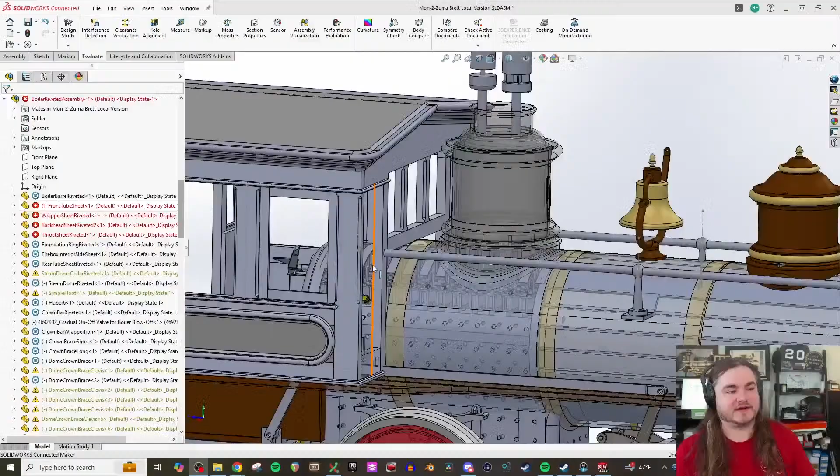Anyway, here we are. I'm gonna keep working on the Throttle today, Mon-Two-Zuma. We got the bar and part of the, we've got the packing gland, the bar, the quadrant, which she didn't have.

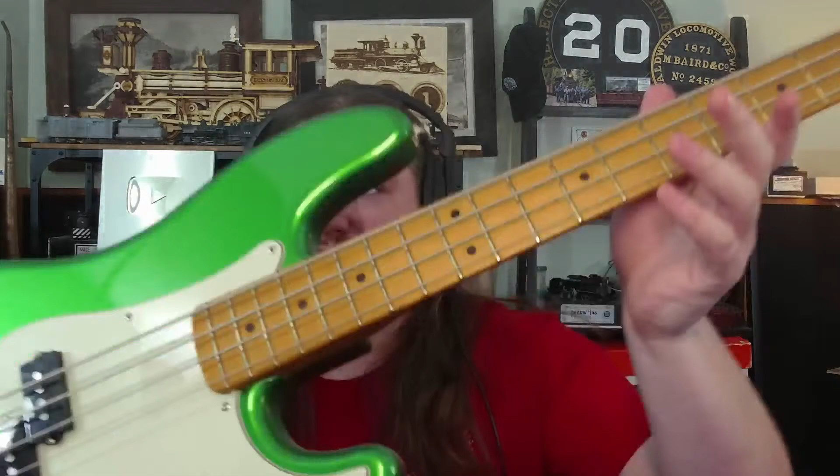William Nimmo: hello all, keep the info coming, you're sick and need the cheering up you always bring my way. Flat or round wound bass, of course. You know, Will, of course, thanks for being a conductor for 2.5 years. I've never experimented with different bass strings. I'm pretty sure these are rounds on my P bass. At least I'm pretty sure they are. You'd know better than I do. I've seen flat ones once or twice, but I'm pretty sure those are round wounds. I've heard flats are cool.

I haven't done much of that, and they work for me, so I don't know. I'd be curious, shoot me an email with what you think. You're the bass playing man. I'm not, I own 3 basses. I was actually playing the upright a fair bit earlier, my fingies hurt. So I wrote a riff on the upright, and it's gonna turn into a song, I think.

So everyone's asking what's more of a pain in the ass. This is finicky little detail-y, this has lots of existential questions to figure out. So they're both gonna suck, but we'll get there. Let's see.

ETW Gaming: I'm eating cheese, just straight up cheese, how do I feel about this? I don't have cheese that I can slap on my desk like James May, but cheese. I mean, it would make me poop, but, you know, cheese is good. Thanks for being an engineer for 20 months.

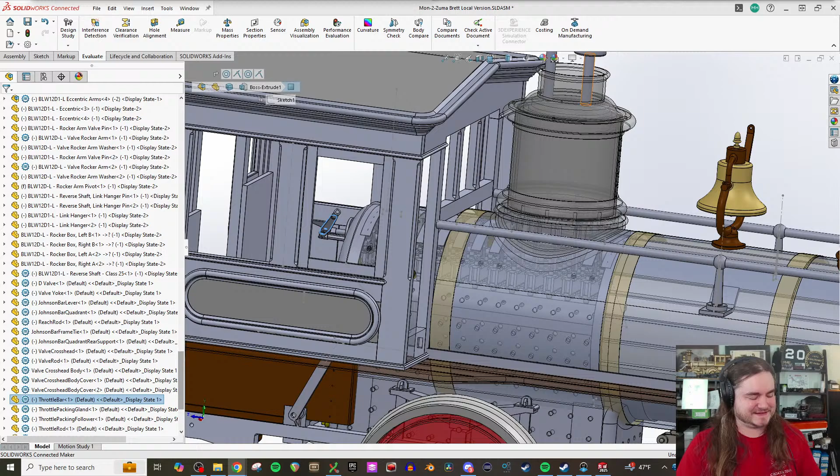Oh well, now we're more on the squeezy thingy, okay, why not, we'll do the squeezy thingy. Tristan's giving me 10, including the squeaky. All right, I'm gonna have to learn one more to get an 11th in there. Is that everything I play? Shrug.

I'm gonna have to look at pictures of Glenbrook again, I think, because she's gonna have a very similar squeezy to what this is gonna need.

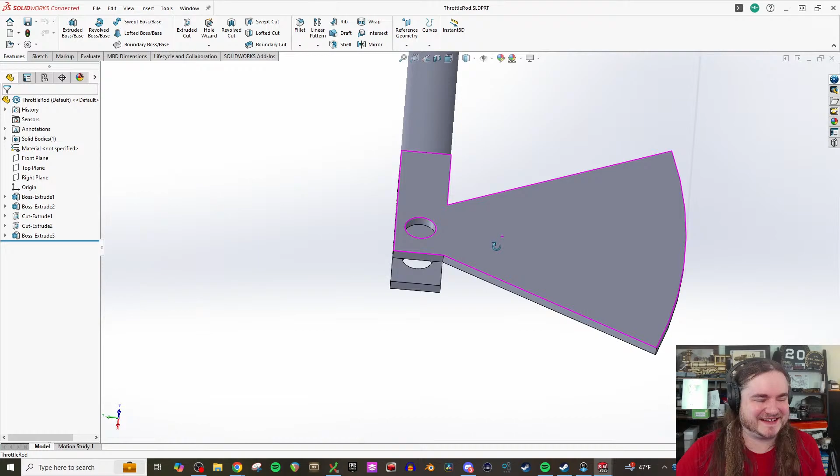Middletown Branch Productions - what will happen and how much alcohol was ingested yesterday. It was not a crazy St. Patrick's Day experience for me this year. I had a couple, you know, inappropriate - don't ever order this in Ireland - beverages. Had a couple Irish car bombs, which are always fun. We had 2 and then a couple beers and hung out, but played GoldenEye and Mario Kart 64. It was a fucking great time. That was at Dusty's, it was fun. But yeah, it wasn't like a super crazy drinky thing, so more low key and reserved. Yeah.

Do I just want to just? It's got a different profile on it than I drew, basically. Looks more like a swoopy, curvy guy.

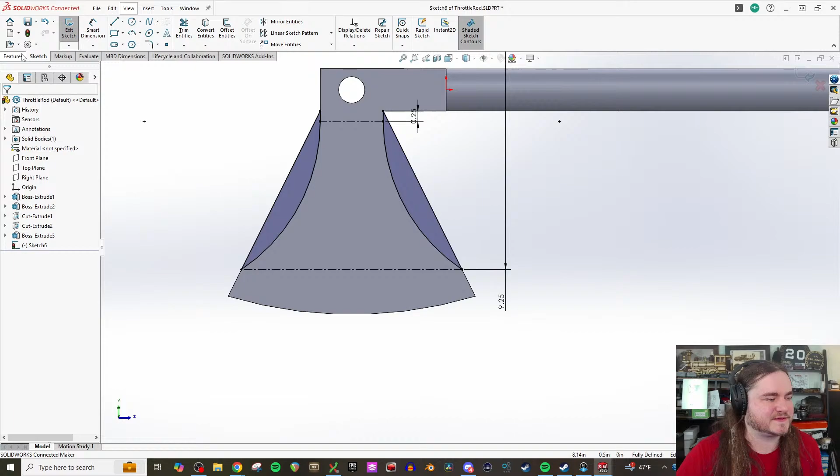Broadway got me a couple more choo-choos to do a video on. They're neat. I haven't actually opened them, but I know what they look like and the prototypes are neat, so I know they're gonna be neat. I need to get that macro lens, I think, because that was such a huge deal at Chris's layout.

I touched an XLR cable that I shouldn't have touched. Don't do that, cannot advise that. Obviously.

Dear Mass Cannon: if it's not already on your list to react to, you should watch the train episode of Mighty Machines, 'tis very silly. Okay, I'll have to put that on my list.

And then Ben Stein asks, would it help if some of Zuma was tungsten? It'd help make it more expensive. At that point you may as well ask, would it help if some of Zuma was depleted uranium? Sure, shrug. All right, that shape sparks a little more joy.

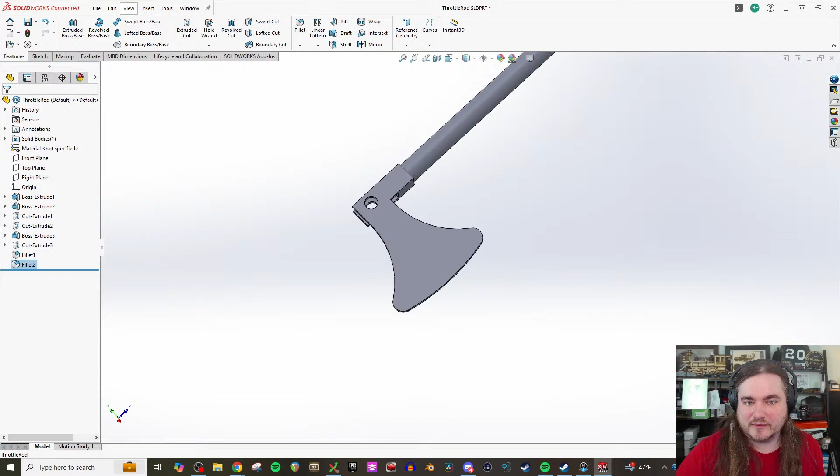Glenbrook's is so decoratively cute, she's got these obnoxious fillets going on just for the sake of being pretty, which is this kind of choo-choo. Also, hers looks like it's thicker than 1/4 inch or whatever we made this. That looked at least to be 3/8 to half. Yeah, I think it's 3/8, I don't think it's half.

But you know, I guess if the choo-choo tries to spit the throttle at you, you want the teeth to do a good job. Oh Lord, oh we didn't even do 1/4, we did 3/16. It's almost the same, it's almost the thickness of the bar. That's thin, that is thin. We don't like less than 1/4 inch on trains.

Oh yeah, that is way too goddamn spindly. What was I doing last week? Talking with Jason Subchinsky and giggling, I think. That sums up most of last stream.

Yeah, we'll just extrude the whole damn thing a little bit further that way. I think there may have also been a 'this looks like a nice start and will be future Brett problems.' There was a little bit of that. That's very true.

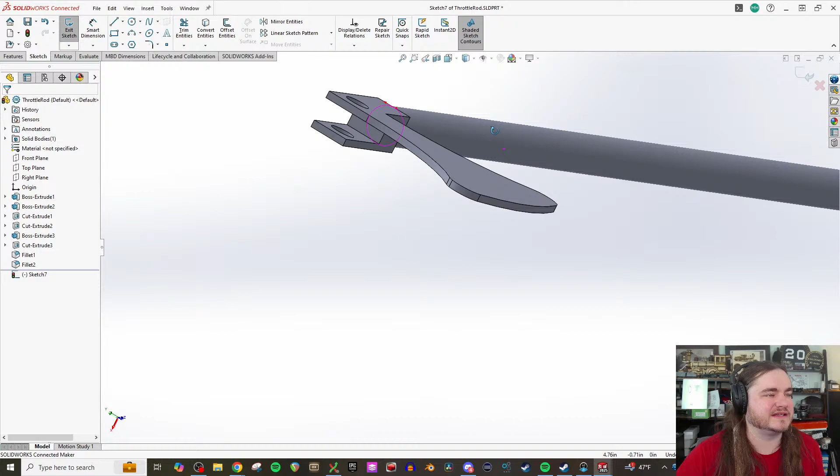Texas Keykeeper: speaking of guitars, have you ever heard of a Peavey T-60? It's been on your want list for a while now, for whatever random reason. I'm not hugely hip on all the Peavey things, so the T-60 I'm not familiar with, but we can look one of those up real fast. I think I've heard the name. Oh, it's kind of a goofy looking thing.

It's like a Stratopol. A Lescaster? Like, well, not really. Yeah, like the front, if you close your eyes at the first pickup, that's very Strat shaped, although the lower horn's a little long, and then it's almost between a Les Paul and like a 335 back there. Interesting. Peavey's a vibe, I don't know if it's a good vibe, but they're a vibe.

What are those wacky toaster pickups, though? That's a great question.

Oh, I should have - nah, we can reapply that extrusion. That's fine, fuck it, we'll do it live. Doing it live. If we do 3/16 that way, we'll get... and then we can just simply make this apply to both directions.

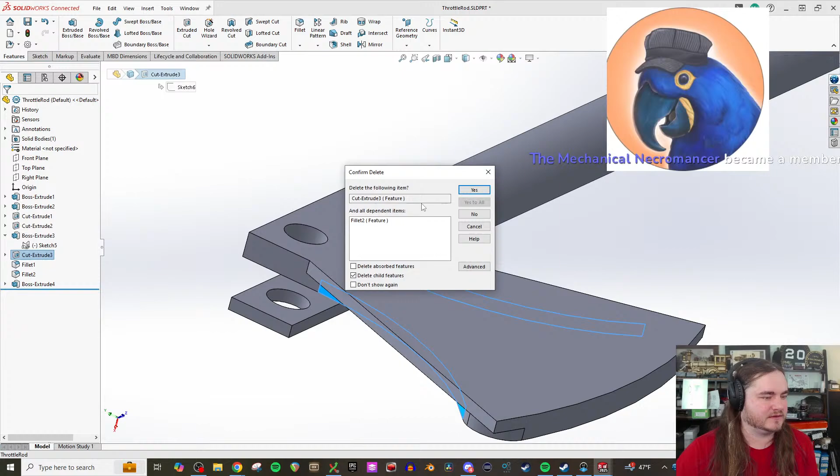Oh, I said 'through all both,' you bitch. Oh, it doesn't know that exists because it's above it. Oh my. Fine, SolidWorks, why you be like this? It's me doing CAD improperly, really, it's not SolidWorks' fault this time.

This is understandable, it's always funny when the real CAD wizards are in chat watching me be an idiot on stream, they're like 'no, don't do it that way.' What if I do it that way, though? What then? Where's your God now? Oh my God, still get the point across. Yes or no, if yes, it works. Basically, I'm not a great CAD person because I do it once a week for this.

And I learned it. Oh God, I learned SolidWorks like 12 years ago.

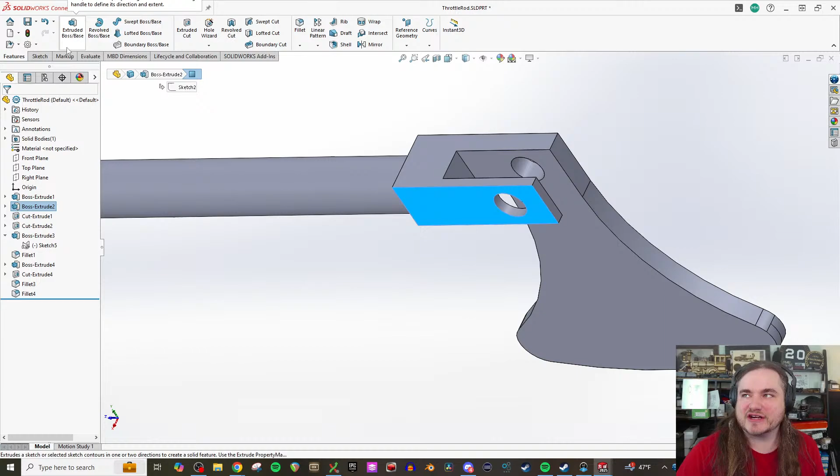Mechanical Necromancer: it's like a Strat and an ES-335 had a bastard child with a Gretsch. Pretty much, it sounds like a Gretsch. I bet it does. I've got one of my favorite guitars for recording, my least favorite guitar for playing actually, because I Malcolm Young'd it. It's got 12s on it, on an electric, because I wanted the Malcolm Young thing. And then anytime I'm like, I need a chunky rhythm and I need to feel like I'm playing a god-awful big chunky rhythm, there it is.

Oh shit, to make that thicker. We're just doing this part all kinds of wrong to figure it out. It's fine.

I've got a replica Filtertron that is zip tied to the pickup ring for the bridge pickup, and that guitar sounds rad.

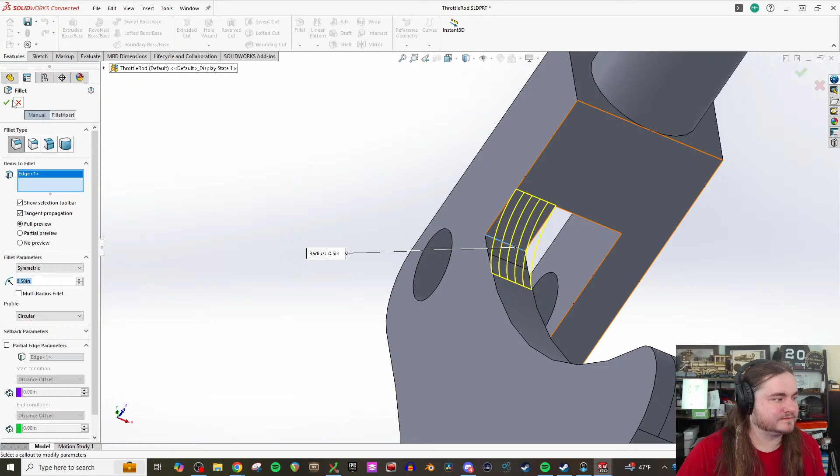Make the things look a wee bit prettier here, put the fillets on them. Fillet o' fish. Yes, that.

Evan Grease, hopefully that's pronounced right. Howdy Mark, building a Lonergan whistle right now, seller said it measures 11.5 inches long by 2 inches diameter. You've been bidding on it for 4 days now. Are you winning? That'll be neat. 11.5 by 2 inch diameter's real small, but that chamber length, the pitch should be ballpark a Norfolk and Western hoot. I'm pretty sure those are 12 inch, so that'll be cool.

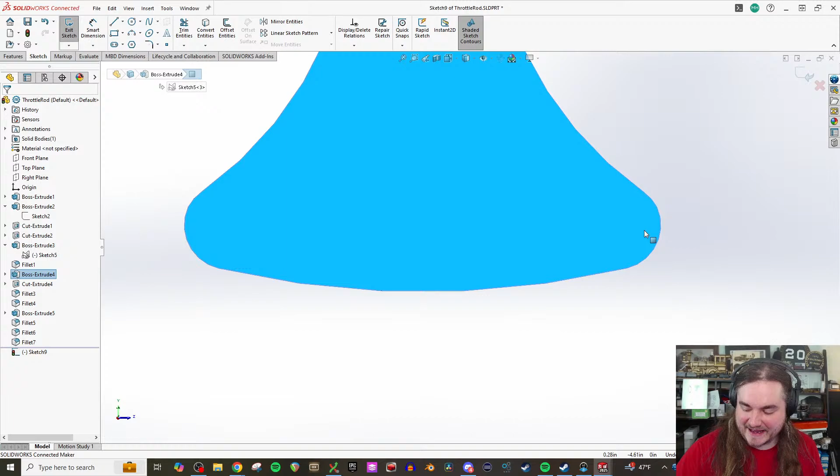Red Gray 99, hi, was Zuma ever the latest and greatest for its time, or was it always just a little guy? It was always just a little guy. It wasn't as much of a little guy when it was brand new, but now it's absolutely itty bitty ancient.

Cassidy HGR, I can only presume this is AC9. Hey, Allagamer, garg my nads. You misspelled gargle. You see what had happened is they were all like, hey, Mon-Two-Zuma Tuesday's going on. I'm just like, oh, I should go up there and poke my head in and see what's going on.

I see, yeah, you guys were doing cleanup sesh from what I could tell. Brace yourselves, everybody. Yeah, we've got the server cleaned up.

My plan is we're gonna take a little bit of a hit to our passenger reputation, but we're gonna try to do an extra freight session so I can get all of the express freight and the extra spawned-in cars off the map, so that whenever we disable those mods, they don't cause an issue. Yeah, that's gonna help big time.

Raider Davis: where we have RCO in Baltimore, most of the tracks are so close you can't walk between them. Yeah, that doesn't spark joy for sure. That's a problem. No, close clearances, they're not fun. I have to deal with the same thing at Conway, the cars down in the bowl are all super close. Especially if it's snowy out and that car is creeping up on you and you don't know anything about it, that's a good way to get hit. You gotta keep your head on a swivel. Stay safe down there, for reals.

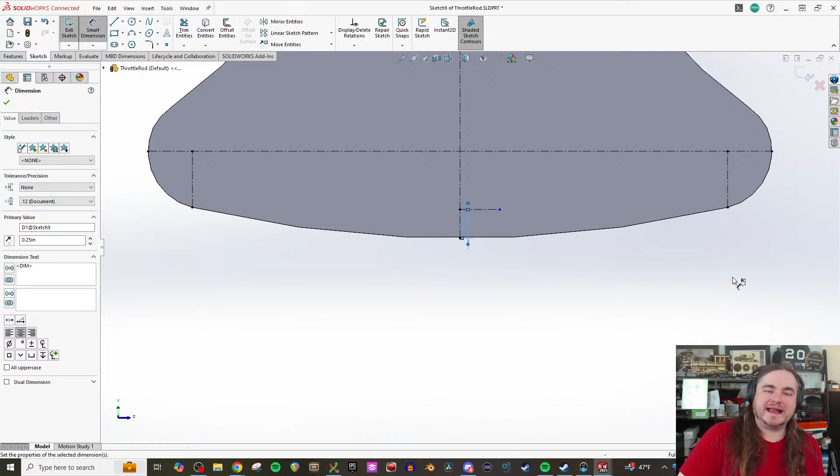Do you know what those track centers are? Spoken like a true civil engineer, Van Dan. Do you think anyone on train crew knows what the track spacing is? Like, actually, like a number they can give you? Yeah, that's fair, I would bet lots and lots of money that none of them do. Depends on where you're at, because they rebuilt some of Conway, so it's not all uniform.

How deep do we think throttle quadrant teeth are? 1/8 inch? I would say 8th. Maybe start at 8th and then go down to like a 16th. I don't think they'd be that small. The railroad is not fond of having things that small in their arsenal. That's true, I'd say 8th. In Last of the Giants, I saw the size of those wrenches - fucking huge. Big chooch, big tool.

Actually, I don't really know a proper way to properly design this, so yeah. Raider Davis, track spacing, too close. Yeah, correct! Designed for itty bitty loading gauge ancient cars, and now we run gigantic modern garbage on it. Well, the thing is the Pennsylvania Railroad, they did try to keep their stuff within its own right, but nowadays it's not.

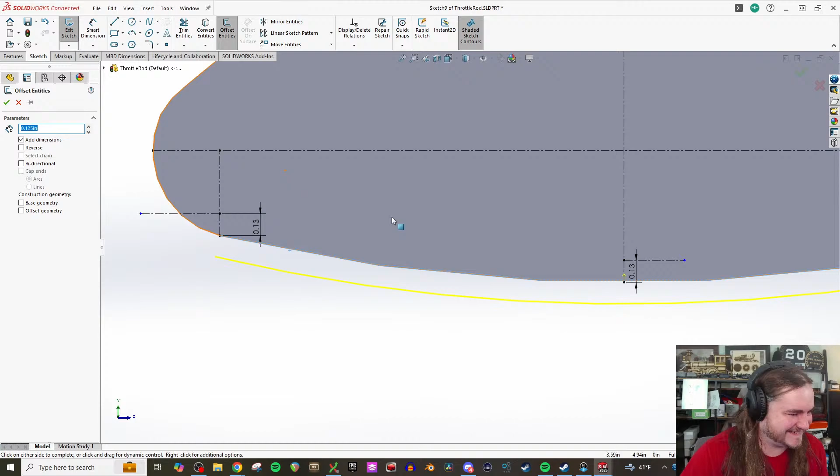Mark, does SolidWorks have any offset functionality where you can offset a line by an 1/8 inch? It does. Damn, yeah, why didn't I think of that? Thanks, Midland, I try. It's just I saw that - I'm like, this might help in a sense. I don't use offset entities often. Yeah, but right, I always forget it exists.

Okay. And we're gonna model these as triangles, Triangle Man. Put some fillets on them, I guess. Remember, you want the triangle shallow enough that it doesn't get stuck, but steep enough that it stays. Right, yeah. This is gonna be - I'm gonna make it look like this. And then we're gonna just repeat it over and over and over again, until SolidWorks says no. Unless it already had - SolidWorks is always saying no.

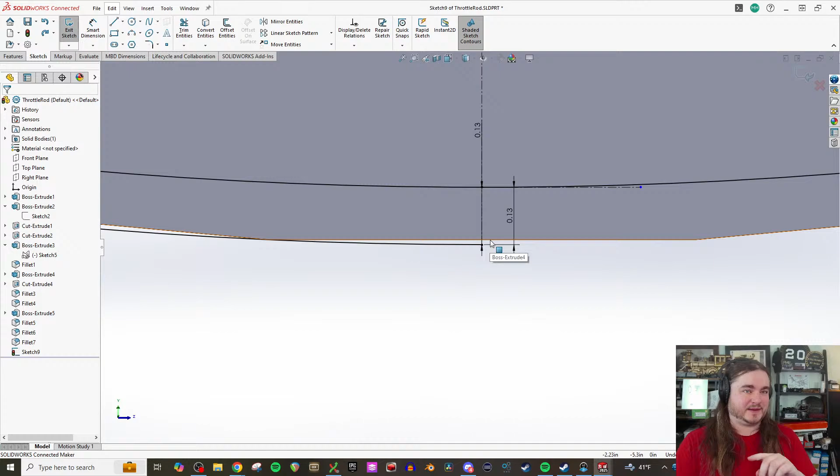Yeah, I don't know what it's doing with that shit right now. It's like, you want this, right? No. Why is that point floating? That's just too damn bad! We want concentric? Yeah, I think it thinks that the way it's rendering it, that point is actually supposed to be on that shape, but... shrug.

Stares at Montezuma. How have I never noticed? I've seen this locomotive in person. How have I never noticed the bell on top of the sand dome? Oh, why you do this? That's goofy.

Why- Oh, speaking of which, Care, I don't know if you saw, but when I tagged you in it, in this game they have the horns right on the GP7s, but not, or GP9, but not the SD7. Like I don't know why. That's weird. I gave you a laugh react on that. That was weird, that was way far back. I haven't looked back that far yet.

It's fine. Yeah, Boker's a little bit more modern. They are kind of cut from the same cloth, though. I mean, it's neat, the pilot looks hell of the same. I still can't get over the bell in the sand dome. How on earth are you supposed to get the sand in? Ring the bell. Ding, ding.

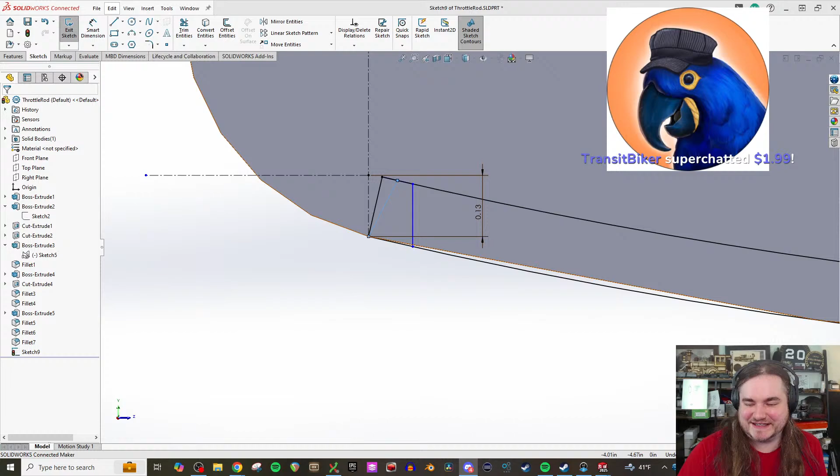If you look at the pictures in Montezuma, we've got that picture of Ute when she was still on the D&RG, and she's got the air pump underneath the engineer's side of the cab. So it means the seat for her pleasure is the engineer's side, not the fireman's side, in the case of Zuma versus JW Bowker.

It's mounted further down on these engines, but I guess the cab's a little higher up or something. It's also a smaller pump. I guess with the 9.5, you'd have to tuck it in there further.

Yeah, because the one you want to put on Zuma, is that going to be an 8.5 or an 8? The most appropriate historically would be a 6-inch. I know the guy who has the patterns to make 6-inch pumps. He's out there.

The challenge with that is there's nothing in the FRA regulations that translates to a 6-inch pump, and they may well tell us to go fuck ourselves and use a 9.5. So if they say we have to, we'll use a 9.5 and have a gargantuan air pump tucked under this thing's butt. A 9.5 isn't big at all, but it is compared to the rest of the engine.

Where's the DE2? It's right there. It's fine. Anyway.

Eden, hey, you did your volunteer orientation at the museum that houses Pere Marquette, Berkshire 1225. You've got safety training this weekend. You're so excited to be finally involved. Do the thing, that's awesome! Love to hear that.

Transit biker, Maschen Yard is adjacent to Hamburg's huge port. Oh, that would make sense. And I got the details messed up on that. I think it was the first incident that started out of that yard, not the second.

Yeah, we need to go look at that engine. Brownsville, Mike Squires asks, was that a steam pump on V&T 21 for a fire train? Oh shit, you know, you're right, it might have been. Because what else are you going to use a 2-4-0 for? Pulling one tank car full of water. Makes sense. Steam jets to scare cattle?

To scare cattle. Midland, have you been here when we've realized that we can see how it's plumbed? I may have been, but I don't entirely recall, so I would love to find out. Yeah, let me pull... oh, I'm not streaming to Discord. Let me do that. Let me pull up those drawings. While I do, I'll keep going through.

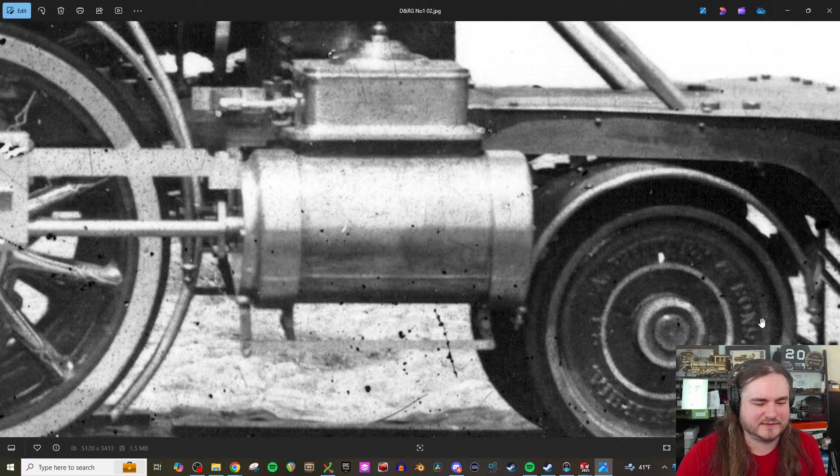I always thought it was, oh, they just aimed the cylinder cocks forward. No, we can clearly see how the cylinder cocks are set up in this. And so you trace it back, and it sweeps up basically under the lead truck or through the lead truck frame somehow, comes in there, and then it hoops up, and then runs hidden, tucked under the running board, all the way back to the cab. And then when we look at the front back shot, which is over here.

Yeah, Discord, if you'd make it easier for me to open pictures, that'd be great. You can see it's way less resolution, unfortunately, but there's the steam jet right there to scare cattle. That one, that's the pipe.

When you look at it in the cab, it's like there are no appliances on this engine. It's nothing. It almost has to be one of the valves up here. Although that might be injector starting, come to think. No, that goes back and then goes down. That's got to be the steam jet to scare cattle. Yeah, because the injector starting is gonna come way higher up. So the injector starting must already be further ahead on the boiler somewhere.

That's neat. Yeah, so I will also remark, when I first joined the stream, I was going to say, oh, so Mon-Two-Zuma's throttle doesn't go through the turret? No, it does not, East Broad Top. God, those engines are so cool, but also, why in the ever-living fuck would you do that, man? One of those mysteries. Yeah, for real. I mean, it's Baldwin, right? But still, yeah.

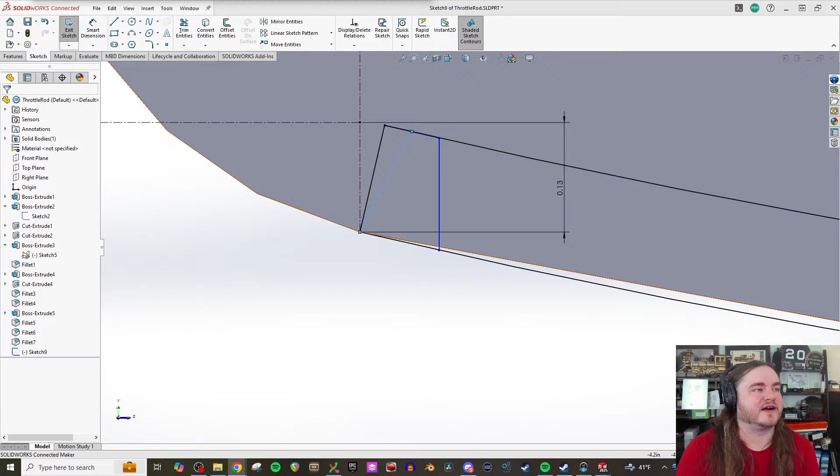Admiral Fraser, hey, new member here, works for Amtrak in Seattle. Oh, cool. Mechanical or train crew or what? Because if you work mechanical, you probably know some people I know, especially if you're out of Holgate. But anyway, if you're really new to the channel, I've lived in Seattle for a long time. I'm originally from there, and I worked for BNSF and Sound Transit out of Seattle for about 6 years. So my choo-choos got maintained by Amtrak at Holgate Street there. So you've got grandparents who live in Colorado Springs - got to visit the museum next time you visit. Please do, come say hi.

John Kissinger, 19 months. Time's fake. Yes.

Steam jet for cleaning your boots, idea - that makes sense. The Class 25s had no air brakes. We just had that discussion. Not as built. Later, yes. Later, when air brakes became a thing.

Not sure if this is going to make objectively too many teeth or what. Let's get a dimension on that. We can make the teeth at least 1/8 by 1/8. That makes some amount of sense, sure.

And then can we do... Some sense is better than no sense. It's true. This is going to be an utter pain in the ass to get a sketch fillet on, and I don't think I want to deal with it.

You work at the coach yard at Holgate. You're a coach cleaner. You transitioned from mechanical to OBS, but you were mechanical for about 2 years. I used to be Chris Geyer's boss, if he still was at the shop there in charge. So, that's funny, isn't it? Cool.

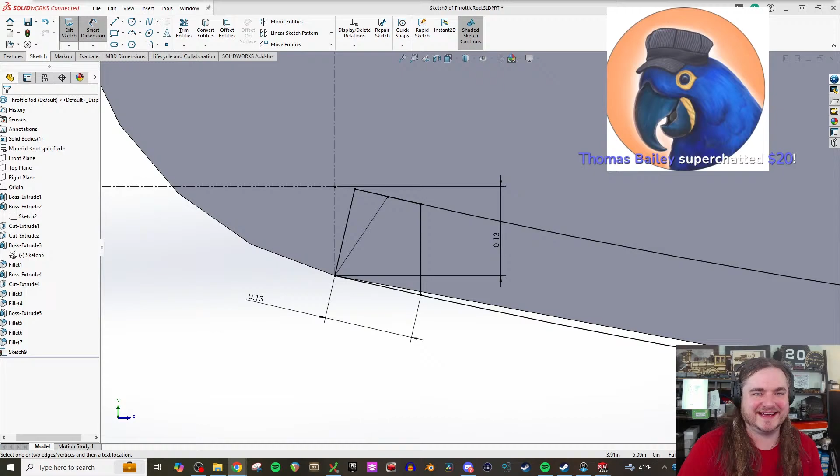Scale Model Apprentice, Zuma versus Pioneer, who wins? Is Pioneer the... What's Pioneer? I should probably know this off the top of my head. Probably. Keep closing tabs. Uh-oh. Chris got walked off the property a few weeks ago for something. Uh-oh. Well, oh no, well maybe I don't know him. We'll need to confirm whether or not I am affiliated with this man. Yep, I was his boss for a time. Oh god, Pioneer. Oh, Pioneer's that thing. Mon-Two-Zuma would kick the crap out of this thing. Are you kidding me?

Adhesion? Did they learn how to use and spell adhesion at that point? A weird fucking choo-choo. Like, I don't need to know the dimensions to know that Mon-Two-Zuma would kick the snot out of Pioneer. Mon-Two-Zuma is ancient, old, and tiny, but she is still 34 years newer than this. Mon-Two-Zuma had been around for 4 years when that thing was retired.

Thomas Bailey, we missed you at Railfest in Reedley, California last weekend. I was bummed I couldn't go. That was so much fun last year, and it just popped up in my Facebook that it was just today was the end of the weekend last year, so... I'm gonna be even more bummed when I send him pictures from behind the fucking 2102 here in May. Yeah, shut up. Yeah, for sure.

I guess circular sketch pattern is the trick. We need to find the center of this madness. That's going to be the fun part. Yeah, it shouldn't be too hard to find. If I grab the midpoint of this line, and then this guy, give me the midpoint of this guy. Maybe it'll let me do it, maybe it won't.

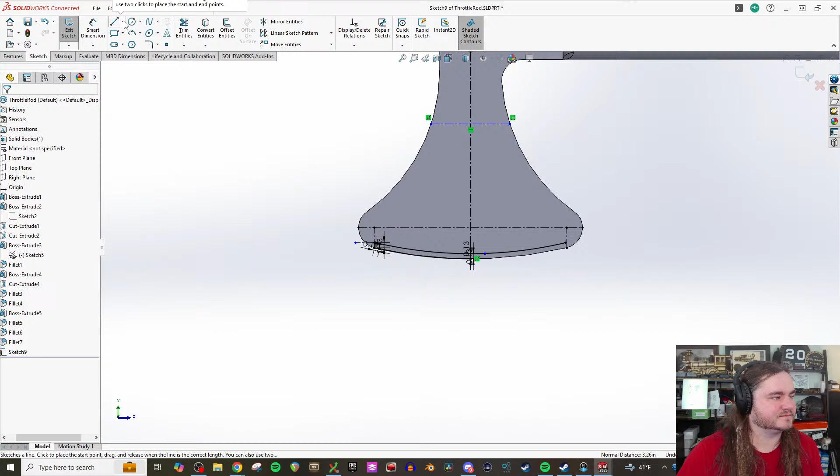Okay, maybe it's gonna be an utter pain in the ass. As it sometimes is. Only sometimes? A little bit more than sometimes. I was trying to be generous. Why? It's not generous with you. Turnabout's fair play, especially when it comes to SolidWorks.

Oh god, is the center of that just like way the hell out? Yeah, there it is. It's a lot further out than I thought it was. It's over there.

So, Mark, I do have a question, or for anybody here in the chat. A thought came to me the other day. With railroads, especially for like the Pennsylvania Railroad, they would have blueprints made up for their locomotives, and they would either make them in-house or at like Juniata, but they would also send them out to places like Baldwin. And I was curious if there was any superiority between the two, like, or would Baldwin just go exactly to spec and they would just basically do the same thing but a different builder's plate?

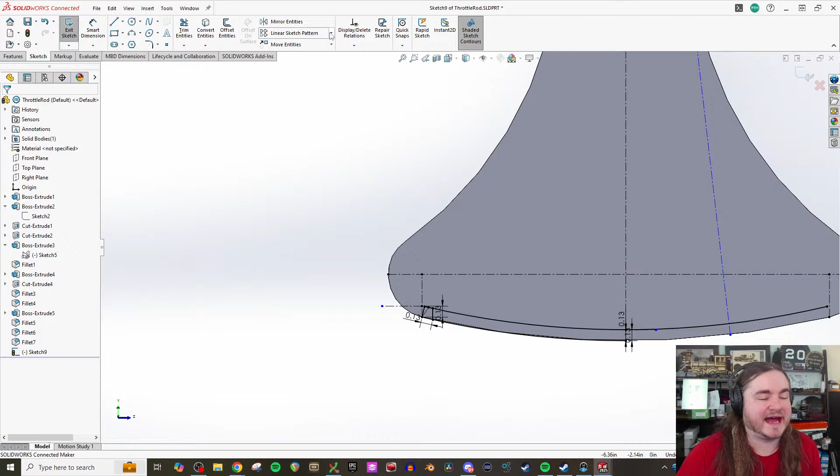I'm sure that there were lots of fun discussions back and forth. Yep, but typically, I mean, somebody would have sticking points about it, and it was somebody's design, and ultimately they probably would have had the say. And then, yeah, it was the same thing, different builder's plate. Paging antimatter, she would know more, because particularly, like, Pennsy locomotives, Pennsy designs built by Baldwin were almost identical from what I can recall, but yeah.

I was genuinely unsure about that case, because, I mean, it's kind of similar with how we do things, because at Juniata nowadays, we will build-ish. We'll do the rebuilds there, but what will happen is GE will just kind of send us the parts. It's kind of like an assembly your own locomotive type deal. You know what I mean? Sure. And I didn't know if it was something similar in that case for building steam locomotives, because diesel locomotives, you just kind of slap the bits together and that's about it.

Sometimes. Oh, Lord.

Alright, that's behaving a little bit more. We don't want to do that. I sent Bandan down a very sad rabbit hole of realizing just how close the track centers are. Yeah, it's a yard, Bandan. They don't care about safety, don't you know?

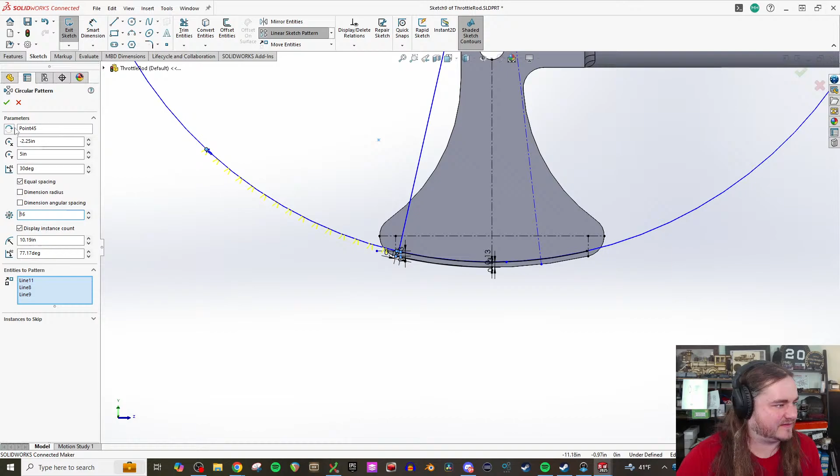Oh, don't do that. Don't change that to... Oh, fucking, you would do that. SolidWorks. Circular pattern. We're not patterning that. We're starting there.

Okay, and we're gonna go some whatever. We're gonna grab our little teethy guys. Ka-tunk, ka-tunk, ka-tunk. We're gonna go the other way. Oh, that's the spacing interval, 10 degrees.

Spacing interval, 2 degrees almost works. It's not like this is super critical. I mean, it's gonna get over time, gonna get a little bit of play in it anyway. I guess it depends on how many teeth they get.

That's almost right. Pretty close. We'll care a lot more exactly about how this lines up when we go to water jet or have this burnt out. Yeah, however you get it made. Laser cut probably. There you go, that looks good.

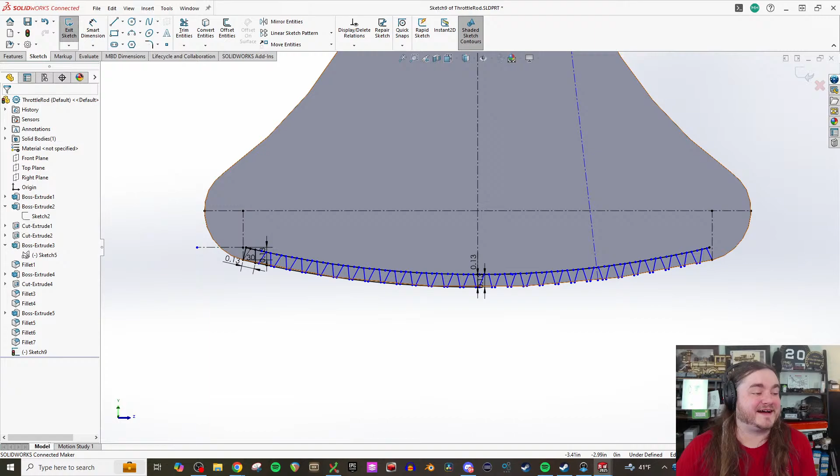Jordan Freeman asks, you know me that I'm aware of the cat Dirt, but am I aware of the Japanese station master cat Tama? No, that's delightful. I've heard the story of a station cat in Japan, and it's a very wholesome story. Sounds very wholesome Japanese lore. They tried to fire her, and like everybody got up in arms, so they left her there. Maybe I heard that, sounds familiar to what I've heard.

Oh my god, don't click the wrong sketch contour, it breaks the SolidWorks, don't do it. How dare you break the SolidWorks? We're playing a CAD version of Knifey Spoony right now. It breaks the SolidWorks again, or it gets the hose again.

Hopefully this doesn't look like shit when I'm done. It might. No, actually, that actually looks like the thing. Oh, good. To quote my friends from Maine, oh.

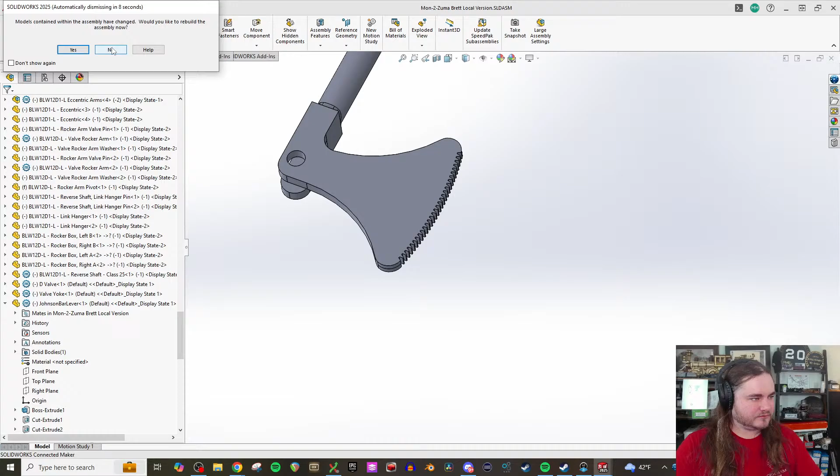I'm pretty sure that's just what Jersey thinks those people on the New Haven talk like. Well, probably. But can we prove him wrong? That's the problem.

Speaking of your railroad friend, battle Maine axe, pretty much. You know, part of me really wanted to do that because most of the things on the model are not like super fine, smaller detail. So seeing something that's mechanically like that, oh yeah, that's kind of neat.

And now we're gonna have to make the squeeze and the linkage and the thing and the stuff. Please. Yeah, we'll work on that next. In the immortal words of Wings and Strings, I must horse like a piss race, so entertain the folks, I'll be right back.

Oh no, entertain the people? Oh no, I can't do that. I don't even know why the fuck you people think I'm funny. Entertain the people, Bandit, oh, you're good at that, I nominate you.

Hold on, wait. So a snake walks into a bar, bartender looks up and says, 'How?' I was about to ask how. You know, the worst part is you were all like, walks in, and I was just like, he did not. I was gonna ask how, I was literally gonna ask how.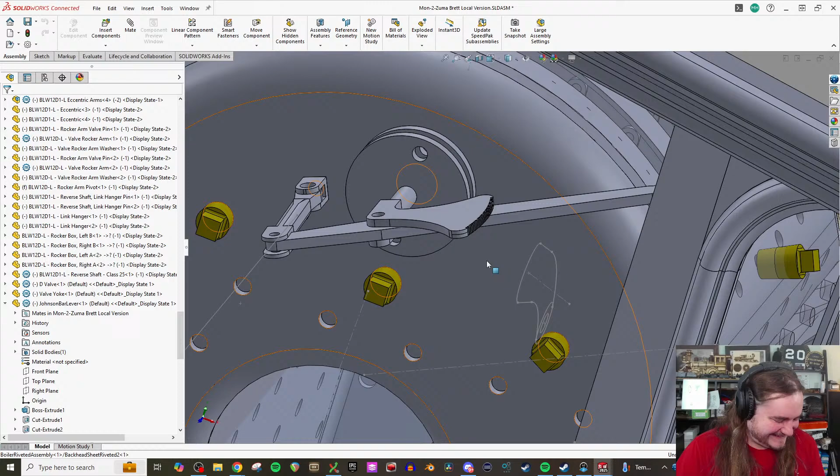What's brown and rhymes with Snoop? Oop, Dr. Dre. Oh yeah. Anyway, that's one of my favorite stupid Reddit jokes that live in my head rent free for no goddamn reason.

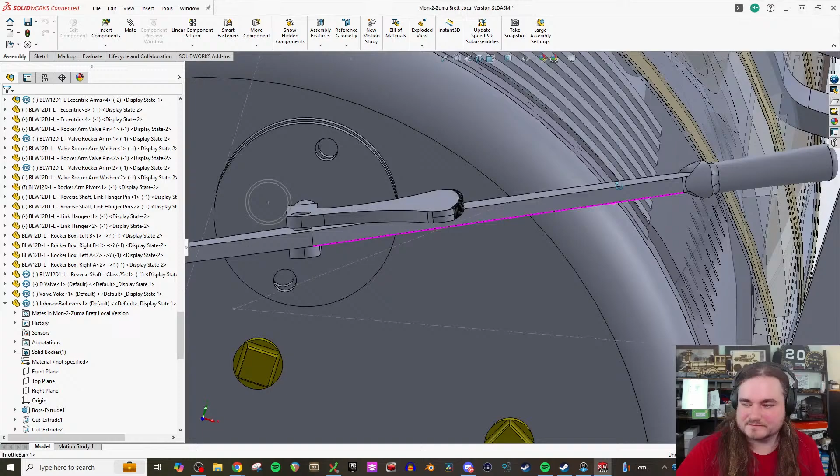Camilo Santiago, shout out to Leighton for helping me navigate and understand Denver's downtown transit system, can't wait to fly out in April for the Rocky Mountain Train Show, it's going to be a lot of fun. Shout out to Leighton for those fantastic commercials and sticking to the bit, I love them dude. Yeah, Leighton full sent to the bit on all those.

It's cold out, how can you tell? Women's intuition? Oh, I love my friends.

Okay, we need a slot and a pin, and the bar we need, and we also need our little clampy guys. We're gonna make two very wee little parts, one of which I should probably just duplicate this so I can get the teeth pattern immediately afterwards, yeah, I'll do that. And duplicating parts in SolidWorks is a fucking mistake, so we'll do it from over here. All right, oh wow.

All the DMs, always, every time I stream.

Admiral Fraser, you're watching the collab series with Con, it's getting you interested in Railroads Online as well. Railroads Online, I mean, it's fun for a time, and it's definitely still a bit of a buggy mess, and it doesn't sound like there's any further dev that's going to happen. People keep sending me all the stuff about it and I'm like, okay, whatever. That was very fun for what we played with it, and it was so much fun to play with Con, but we had a good time with that, and we're just waiting on something else. It's fine, anyway. Hey, someday that something else will be done, that's the plan, it'll be done eventually, one of these days. I'm going to be working on that tonight, probably late.

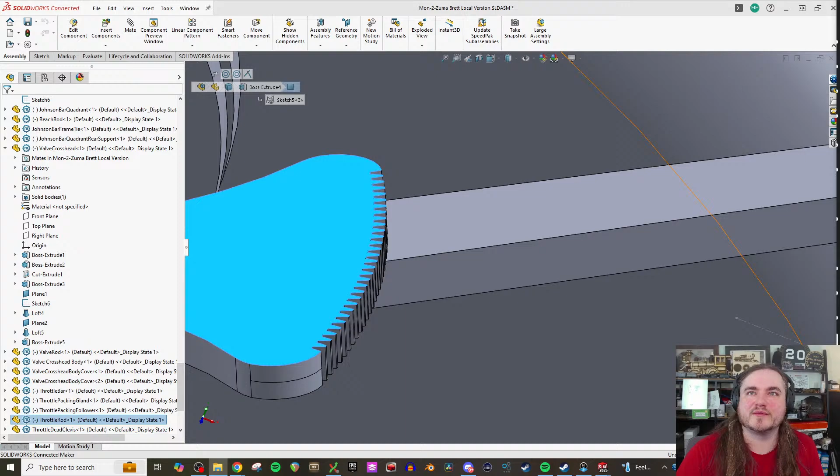I need to film some more of that this year. It's like you have a trip coming up that maybe you could get extra behind the scenes footage for. Lordy, yeah, it's gonna be a fun time filming all this stuff for the upcoming adventure here.

That sounds like a job for Rex Anger. It certainly might be. I'm gonna hand that man a camera, we're gonna see what happens. He's been the biggest damn help really for that whole trip, so it's been immensely appreciated.

Crikey, do I just do the Brett thing and just make a box and kill that and use the sketch? Yes. Midland said yes, why not?

Well, I've learned that if you don't do it the Brett way, he'll just say that you should have done it the Brett way to begin with. Well, he's got a lot more CAD experience than me, and it's now his job, so. Would that make it the Brett and Butter way?

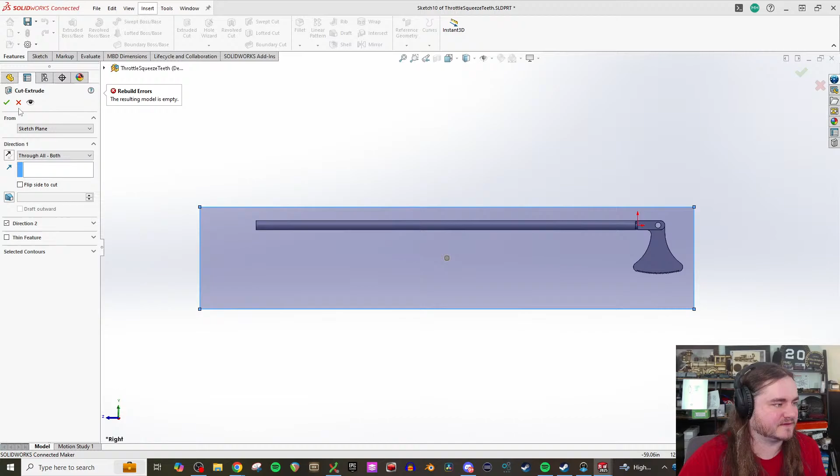The resulting model is empty. Yeah, what if that's what we want? Butthead? I'm sorry, this is the wrong kind of channel, we don't do joint content here. You might find a more 420 friendly thing somewhere else. Mm-hmm, no, well, details.

Okay, so I can't do that. I guess I can just delete all of the extrusions, and then it should just... Oh no! Don't do that! Don't do that, don't do that, or that, just- or that.

I guess I could just hide. Can I hide the stuff? Oh yeah, we could just hide the whole body, and then there'll just be a throttle rod living inside this.

So wait, have you drawn straws yet to see who has to fit in the boiler to get the throttle body out? Well, that's the neat part, you don't. The dome is flanged at the bottom, so the whole dome comes off, and the throttle will be standing proud. Which we're gonna... I was mulling around that earlier on how we want to do that. We're gonna have to probably build some kind of braced weldment to hold it.

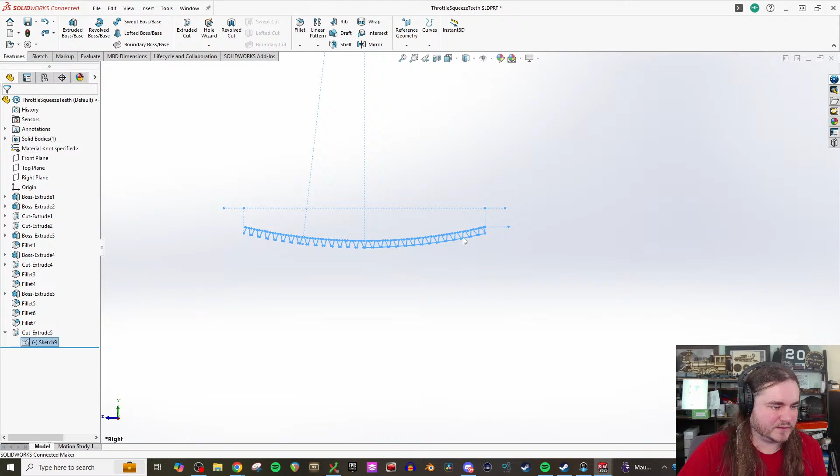Well, squeezy probably engages 4 teeth at a time. I guess I could look at how thick the throttle rod is. And I'm going to have to modify the throttle, or the throttle bar, anyway.

Vaguely where the squeezy is happening. Yeah, we can get that dimension at the 1.5 there. So the squeezy is probably like 1 inch. Tracks. So we want something that's, you know, we want to do a sketch.

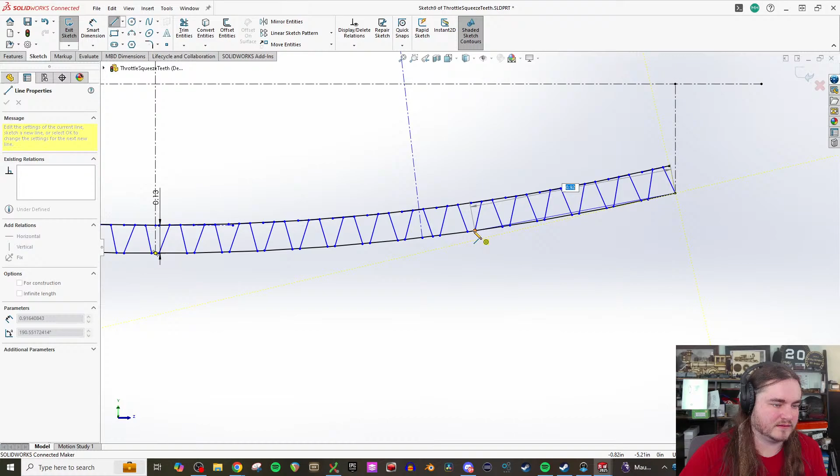Oh, we didn't get the exterior guy. We can mirror him real fast. And we're basically just gonna make a box that's about most of 1 inch wide. Because that'd be 1 1/16. I don't think it's 1.25 inches. Yeah, we'll just go. There's Phil. And it probably then comes up, and it'd be a box.

Although it's an angled box, so we're gonna have to... Oh no, the dreaded angled box. Pretty much. Equal. Oh, really? That's what equal does? How about collinear? Oh, it doesn't want to do that. You made me a box. Fine, fine, I will manually make the box, due to great frustration.

Why are you trying to make something on an angle? Because I hate you, SolidWorks, that's why. Yeah, 2 inch. Maybe like, just make it 1 inch wide.

Oh, don't you move those fucking teeth when you do that, you bitch. Like, this is what you want, right? We're gonna... well, I guess the teeth... No, and I don't know who told you I did, and they were wrong.

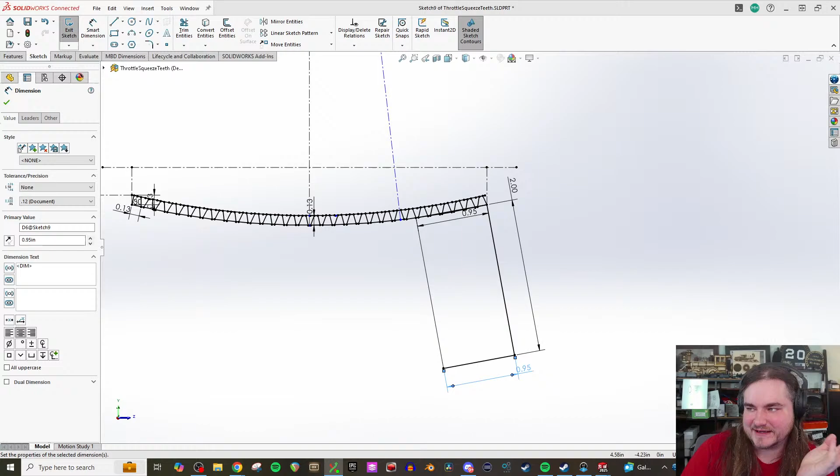Yes, but just think about it, eventually it'll all be worth it. Yes. It's a lot of work, but it's super fun. It is cool, but it's not something where you can... sometimes you can mindlessly watch something, but sometimes usually not so much.

All right, then we make the little teeths. We make sure that it selects all of the damn regions. Or maybe we'll just trim those. Give him a wee little trim. Actually, yeah, we can just blitz through that shit, can't we?

And that'll give us a little clearance, and that'll be nice. Cool.

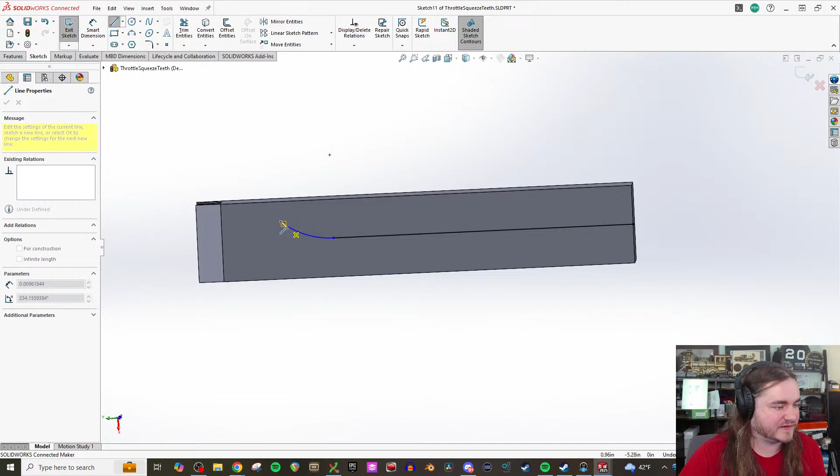Because, again, Midland, I don't know if you watched all of last stream or not, but we learned that Mon-2-Zuma didn't have a quadrant. She had a little stopper that you could tighten down like a locking dog. Okay.

It's apparently a common early thing, and all of us collectively went, you know what? We could, but we could not. I vote the could not. So, I very much vote the could not.

It's cool. Jordan Freeman, tomorrow episode 2 releases.

Okay, well, speaking of what, I am going to take, don't worry, I know there's so many of you who are so kind and you're like, Heist, don't just work. And I'm like, but I want to because I just copy my dad a little bit sometimes. It's fine, it's genetic or something. And my granddad, both sides of the family workaholics, but...

My sister and I are going to be watching the next couple episodes of Invincible after stream. Season 3's out, dude, did you not know? I didn't, no. Oh yeah, sorry. I've heard several good things about this season so far. Season 3's out, I've watched the first 2 episodes. My sister and I watch it. It's one of the few ways I get to hang out with her these days. So, but it's fun, it's a great show.

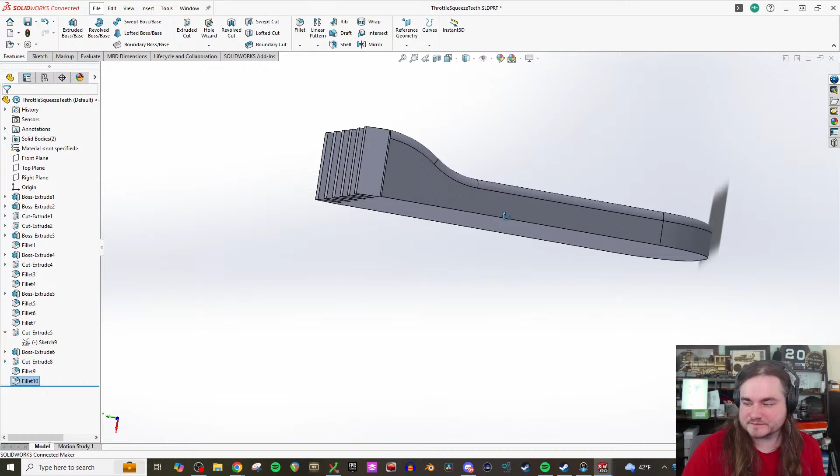So this thing must have... this thing must have the pins built into it. Well, at least the one pin. Because when you squeeze the throttle squeeze, it grabs and pulls this way against a spring that's captured in there, and it unbites the teeth.

And I'm not seeing any bolts or any other heads sticking out of that side. That's kind of an obnoxious way to do it, but we could weld a pin through there. And those are probably 1/2 inch.

Oh, Rex is here. We were talking shit about you earlier, and by talking shit, I mean praising you.

Working hard or hardly working, it depends. It depends. Yes, yeah. This is allegedly work right now. This is interesting work, I mean this is providing funding for your continued existence. It's very true. Did I mention that birds are working again? Anyway.

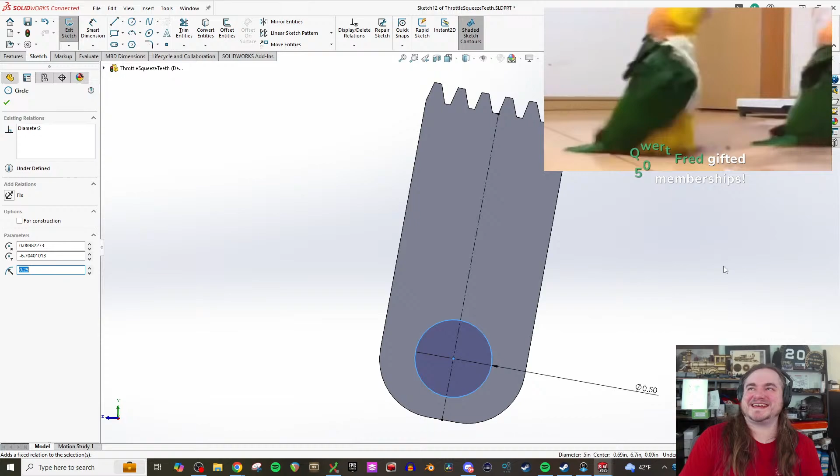And every time, I almost want to turn the volume up some more. Because it is surprising, but it could be more surprising. It could be more surprising.

These might be 3/8. Half looks a little stout. Yeah, yes, that looks better.

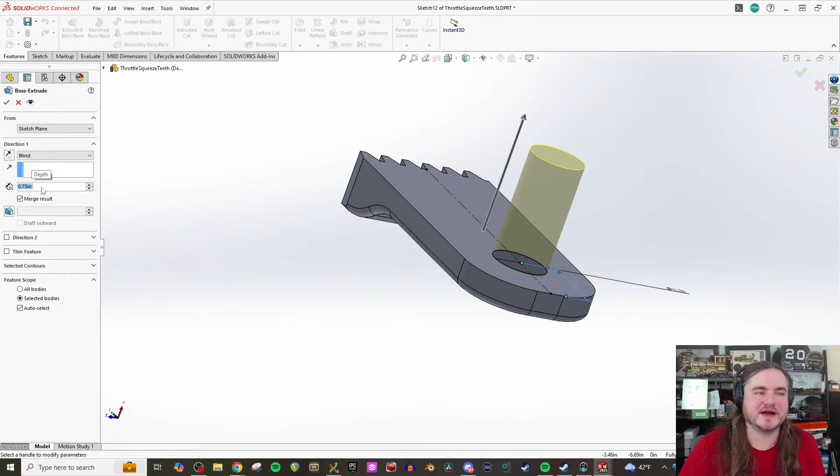All right, well, there's a little guy right there. Right there. And as that little guy takes shape, I must bid everyone adieu. Have a good stream, bye, it's good to chat with you. Good to chat with you. Yeah, I gotta bounce too, so I'll see y'all later. Roger that, take it easy.

And there were 3. Yeah. Yes.

Let's see, insert components, we'll get our squeezy boy. That's going to be interesting to start setting up mates of that. Where did he go?

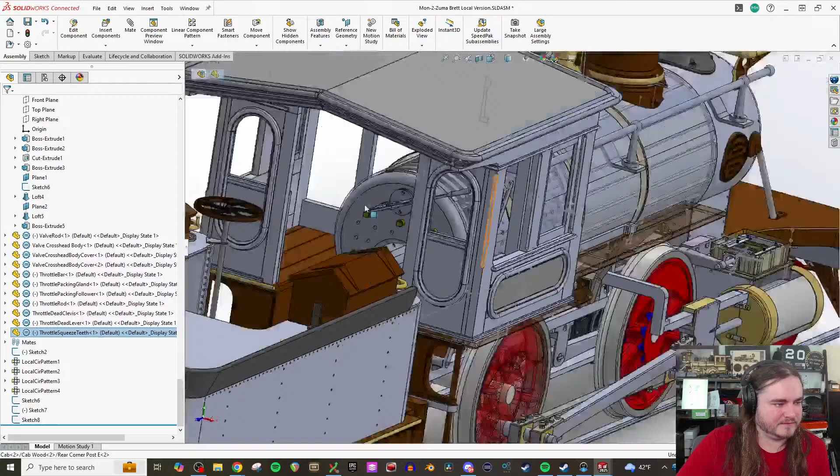Is that what I'm hearing? Oh, that's real fucking annoying. 1 second. I'm getting these weird little pulses of bass in my headphones, and it's my microphone slowly drifting looser, ticking down. It's probably not audible on stream, but goddamn, what an annoying little thing. I'm like, am I having a stroke? Is that my blood pressure going to infinity, or is there bass coming through my headphones? It's fine.

Again, where'd you go, little part? SolidWorks put it somewhere stupid and I can't see it. So we'll just put a new one in, make it easier.

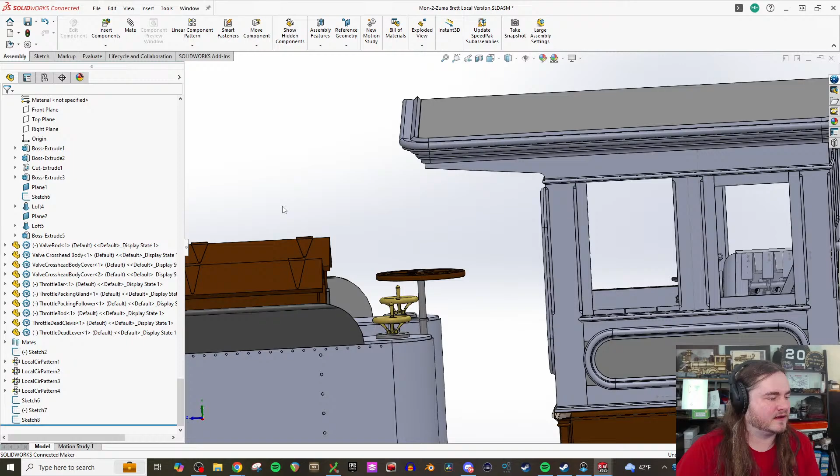Molden House, coming to Denver for a few days around next weekend. Which days would I be at the museum? Also, would you recommend one Denver enterprise over another, like a rental car place? I've never rented a car in Denver, so, shrug, but enterprise is usually pretty good. A few days around next weekend.

You think of the 29th and the 30th? I've been, I'd say I'm typically doing Fridays, Saturdays these times, but I've been so busy in advance of the Australia trip, I haven't actually been to the museum in a couple weeks. Shoot me an email, shoot me a DM, and I'll chat with you about it as things get closer, 'cause it'd be great to meet you. You're always on streams.

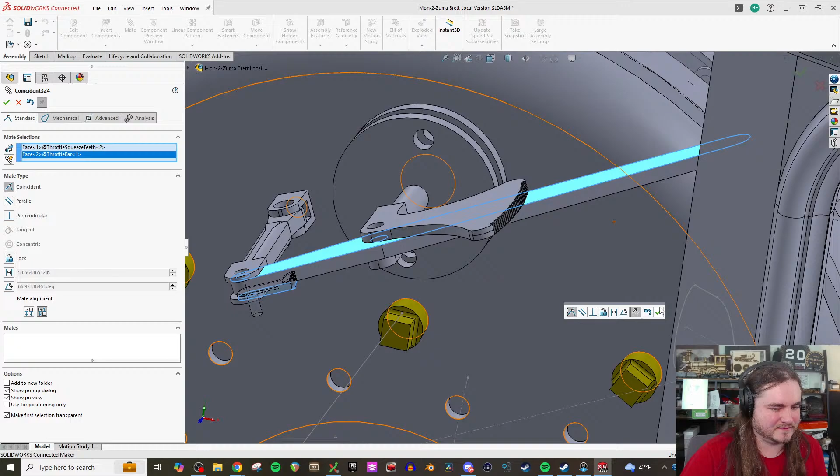I see Matt's joined us. The CRRM is in chat. That's funny. Don't look now, the boss is watching. Matt's not my boss, Matt's a good friend. Matt's a fellow Invincible enjoyer, though he was hip to it before it was a TV show, so.

Oh my god, Matt, oh fuck. You asked about this so many times, at least twice, and I completely spaced it. Let me do that right now. The museum did release a new Big Train tour about the HO Scale Model Railroad Club in the basement at the museum, which is a freaking awesome club. Matt asked me several times to make a YouTube post about it, and I was like yeah, because I'm always here to help promote museum stuff. Whoops.

Hi there, Birdman, would you like some crackers? Oh god, I was like who the fuck is that? Oh, it's Jason Subchinski, hi Jason. Hello. I sure do like your beak, it's nice and majestic. Oh, got some popsicles down in the basement. It's fine, exactly.

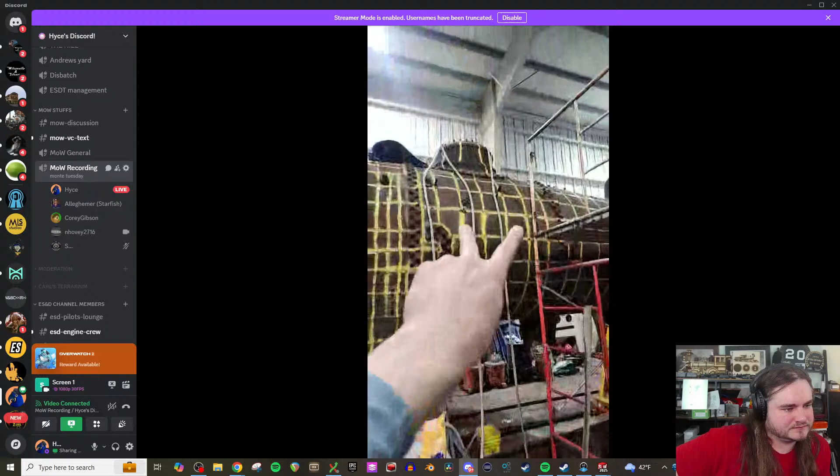What you guys doing? Acid washing the boiler of the 2425. The 2420 - oh, that's that engine you recently brought there. Two-line thing, yeah. So I have water running into an ag tote from both blowdowns, 3 sump pumps feeding 3 garden hoses. They go up into the dome. One goes in, splits, PVC all the way to the back head. Another goes in, splits, PVC to about a third of the way down the firebox. The other goes in, splits, the PVC about a foot behind the rear tube sheet, all of which have elbows. That's the front tube sheet, you loser. On them. Yeah, it is. What did I say? You said the rear tube sheet. Oh for fuck's sake, hi, my name is Jason. That is back, that is front, this is up, and that's down.

How often do you have to do that? Just during rebuilds, or? Yeah, so this is - I'm curious about this, I mean I could understand several metallurgical reasons why you'd do this, particularly if it's like a scaled up shitty pile of garbage that's never been taken apart. That's my guess, because I've never heard of this being done, but I've also never really started one of these from this deep before, so. Well, I have props.

We interrupt this broadcast for this Steam guy. Sorry, I didn't mean to hijack. Oh, you're totally fine, we always learn something from you.

Holy Jesus God balls! No, Jason, no, say less! Oh my god, what a clapped out piece of shit! Yes, and then, but wait, there's more.

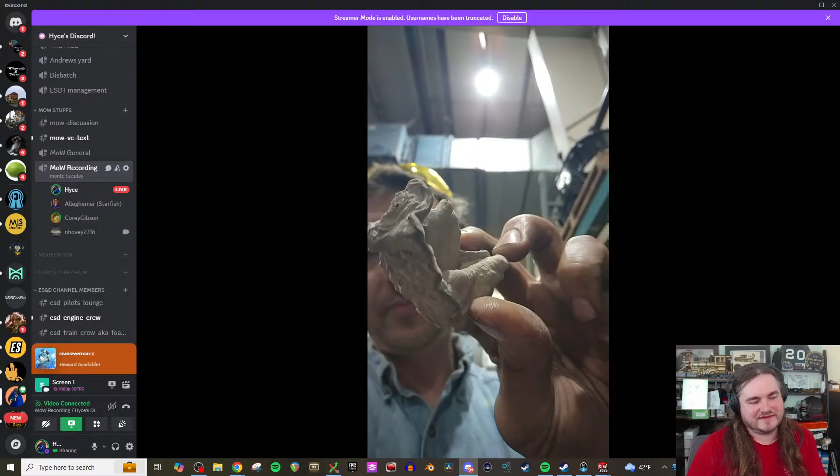Yes, without a doubt. So I did this also on the 2716, which ran in preservation, obviously. For those unaware, since there's an audience I didn't know about before I hijacked things - it's fine - the 2716, 1943 Alco-built C&O Kanawha.

God damn it, so how much scale did you get out of the 16? A substantial amount - it only had about a hard eighth inch, solid, of scale on everything, and it took it down to where the metal was about 50% bare. What was not bare was only the hardest of the hard red scale still adhered to the sheet. This is something I recently discovered, and I can send you photos since I'm sure you'd be interested.

Naturally, they were doing boiler descaling, acidic washing of boilers on an annual basis in Russia in the 50s.

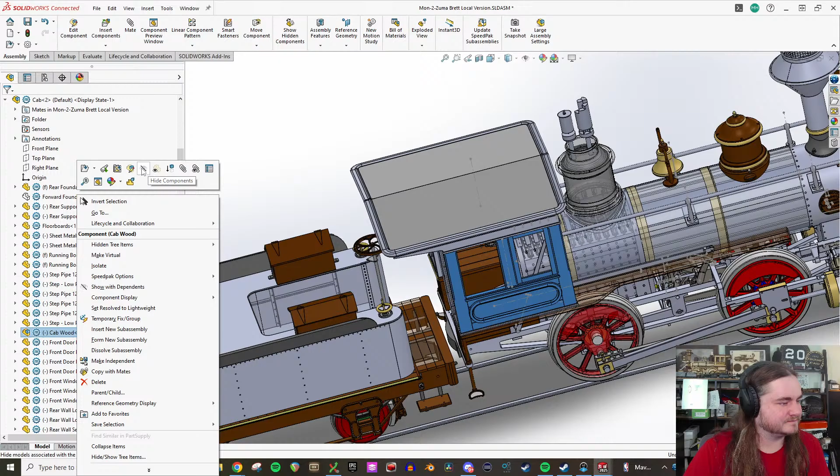Oh, that doesn't get the roof. The roof's a different assembly.

I can't remember what job I was at, but somebody was like, hey, what's black and white and red all over? And they were all like, oh, a penguin with a sunburn. And then somebody's like, no, it's a nun falling down the stairs. I was like, holy shit. Tell me you work at a shop. It's fine, I think I was working at the lumber mill at the time. Well, it tracks, which would make sense.

Is there a way to search through parts and assemblies in SolidWorks? Or is that just too much to ask? I guess I could, because I want to hide this so I can see all the things. There we go.

Okay, so I need to kind of mate this guy in. That's a good one.

I lost my job at the bank on my first day. A woman asked me to check her balance, so I pushed her over. Christ, that's a good one, Dylan Brooks.

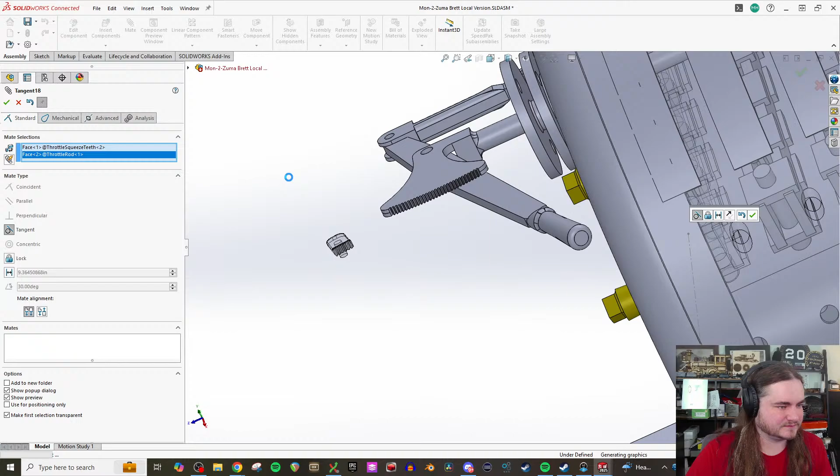What if I want you to mate it the other way, SolidWorks?

All right, hey, there we go. Oh, I shouldn't have made that first one be exactly the way it was. No, it did get it in the position. Oh god, yeah, this part's orientation, or its origin, is all kinds of fucked up, which is why it's behaving real stupid. That's alright.

So we're gonna center that kind of vaguely there.

Admiral Fraser, I gotta come back to Seattle for a visit sometime. Mount Rainier Scenic Railroad got saved and has been running better than ever now. Oh my god, I do. I was in Seattle 3 or 4 times last year, and it's pretty typical that I visit a couple times a year. Mount Rainier, when I'm visiting and trying to see family and stuff, it's so hard to justify going down.

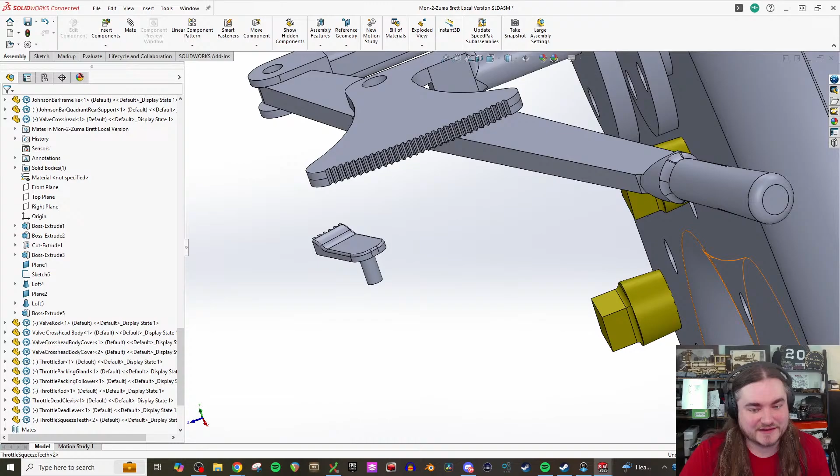Though I do know that Rowdy and Bethan will be out my way in a couple weeks, and I'm hoping to take them out for some adult beverages and have some conversations. I think that'd be stupid fun. I'd love to see you and Rowdy get together. I'm really hoping that we could do some stuff because they're good people, they do good work. You know, I want to see that stuff, and Rowdy would make the easiest like oil burning 101, hey let's do this. Because he's got the presence for it, and he's got the choo-choo, and that'd be awesome.

Speaking of 101 videos, I just remembered, I found you a checklist for helper link stuff that we're supposed to do at the start of every shift. Oh, kick-ass. I will see if I can go out, get my MTR on the rulebook, see if I can get it to you at some point. Just gotta remember to do it.

How did we get those? We did not get those radiuses right. And I will get you a better picture of helper link at some point, that picture I sent you was pretty shitty. Appreciate it.

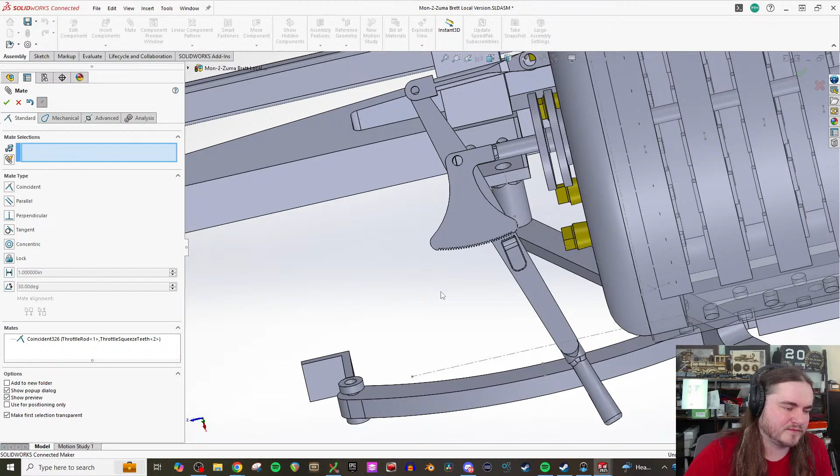Did I have the wrong dimensions plumbed in on that the whole damn time? Because that should be tangent with the bar.

Oh, either way, I want to come see Mount Rainier. I volunteered there for a day in 2014. It's been a minute, so it'd be fun to come see what they're up to these days.

Okay, yeah, we need to figure out the original throttle rod itself. Nope, not end of the line yet. Go away.

Do I not have the throttle bar open? Oh, there it is. So our center to center that should set the pivoting action is the important thing, and we must have that wrong.

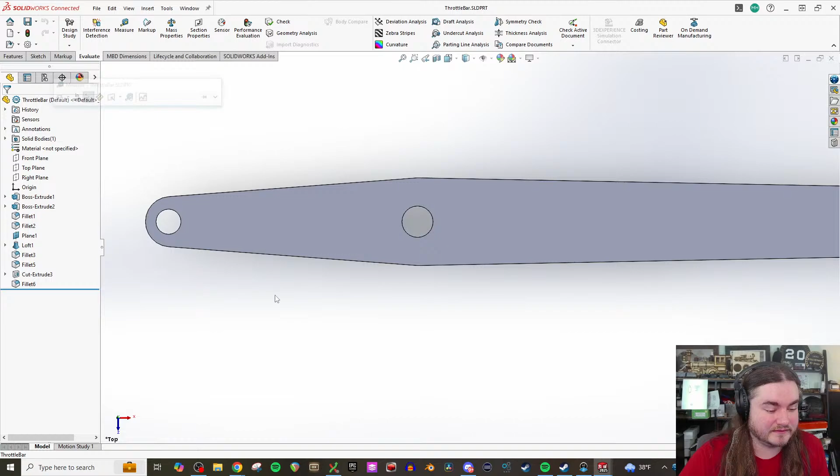God, SolidWorks is making my computer sound like a jet. Doesn't usually, don't feel bad. Railroader makes my laptop sound like that on a regular basis.

Okay, let's see, those are all fine. I think it's... where's that cut extrude that has... No, which sketch? Sketch 3? No. Sketch 4? Sketch 5? Okay.

No, we gave it the same 5-inch.

Oh, I need to extrapolate the other end of it out to the other end of the bar, don't I? And then yeah, where is your center? That center's there.

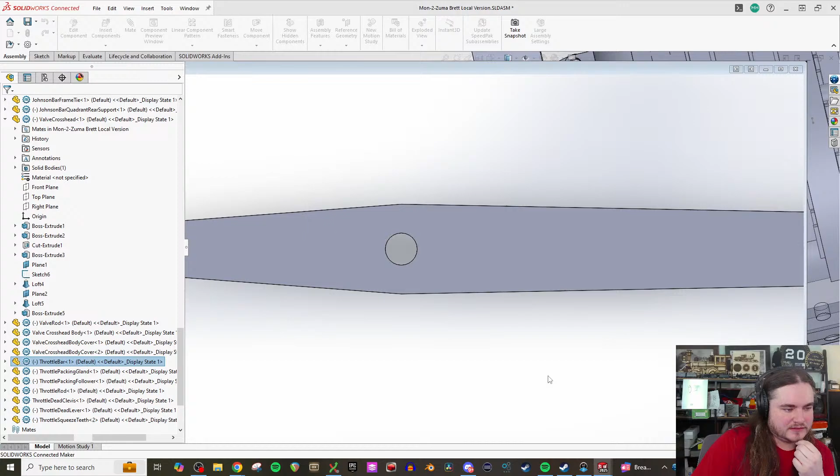Why is this not making sense? Oh, goddamn you. Yes, go back to normal thingy. Damn you, He-Man.

Looked up in chat: Spac-Man with the true story of the largest dice roll in history. The semi crashed carrying D6s, spilling 216,000 D6s for an estimated roll of 756,000 points of damage.

But does it hit? That's the real question. Did they roll to hit first? If you didn't roll 1d20 before crashing the truck, it doesn't matter. That's funny.

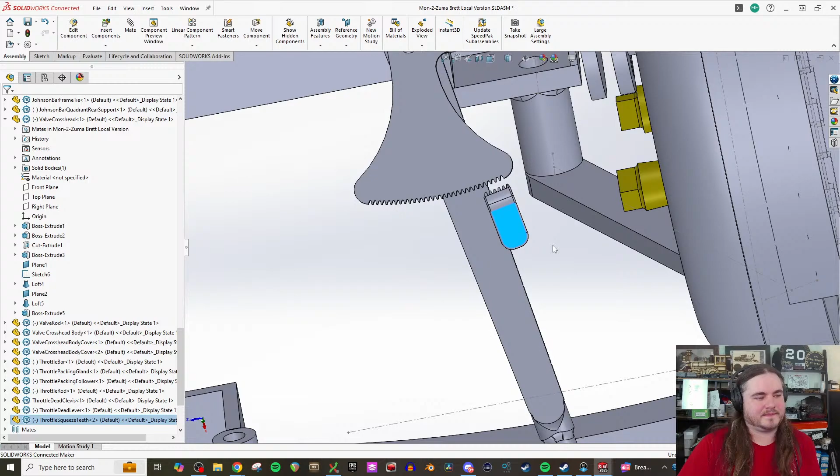Oh, hang on. I guess I shouldn't be trying to mate the teeth perfectly, because... yeah, okay, I see what's going on. Alright, so if we pivot this whole damn thing to where the... oh no, we can't pivot that, we have to pivot this. Whatever, we'll ballpark it and make it a slot. Okay, with the teeth meshed, we just need to find the center line of the teeth to the hole, which I guess I could, or to the pin to pin. Center distance is 6.955, and it's not going to be exactly that because it's going to be there. We'll do like 7 inches maybe out on the throttle bar.

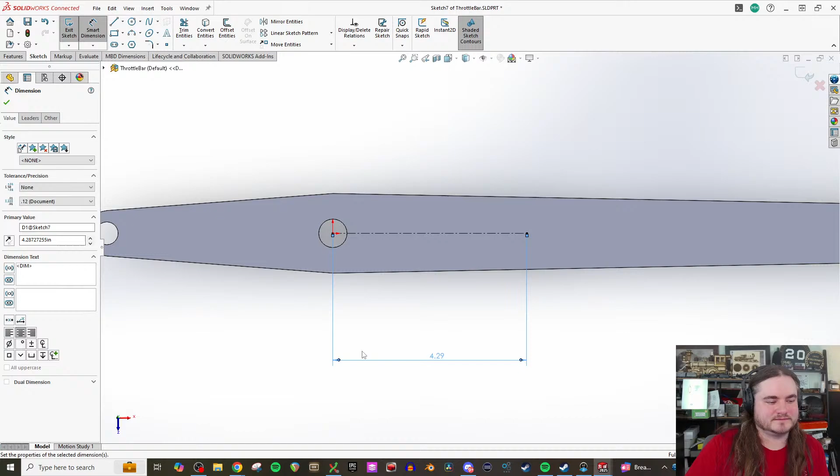Dylan Brooks, the man who survived pepper spray and mustard gas, is now a seasoned veteran. Oh, that's a good one. Ouch, is that Corey? Is that what happened to him? I'm not a seasoned veteran, but I'm pretty salty about it.

Tracks. And we need to make a slot for a 3/8 bolt, which is a radius of 3/16. And it doesn't need a ton of travel, but not half an inch, that might even be too much. But then we extrude the cut through it. Okay, there's that.

Panman 491: it's the Navy official policy for gunfights. Send in the Marines.

You're gonna start triggering poor Corey over here. It's fine, according to you we'll give him a crayon, he'll be fine. I don't know, man. My world was shook when I watched a Navy human eat a crayon right in front of me.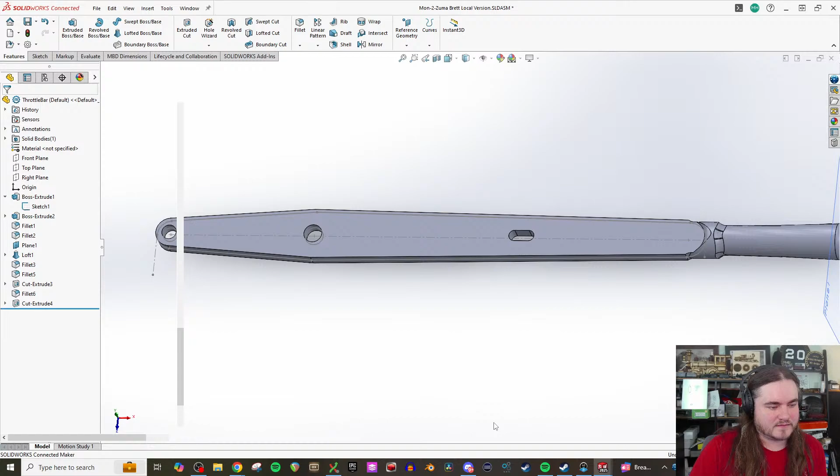You know how sailors often get called squids? No, I'm not super hip to all these things, but it seems reasonable. Well, you know what a squid is, right? It floats through the ocean and shits on marine life. That's good, well said. Alright, that's pretty good.

I need to make a little quick center line on this, make my life a little easier.

No, Puffy, the purple crayons are the best. I've heard from several that the purple crayon is the best. That seems pretty valid.

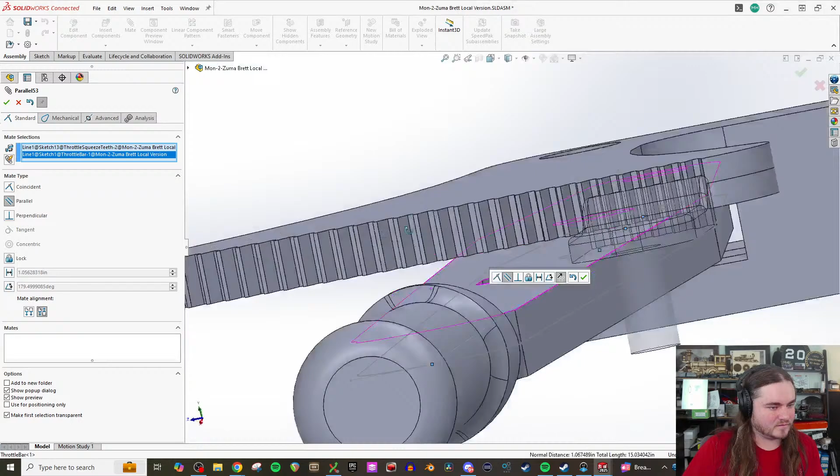Oh man, I'm making SolidWorks angry. The what's wrong box is flashing up and up and up and up. And my part has disappeared. Oh, that makes sense why. I shouldn't have made this coincident. Okay, fine, it smells like Kenosha's playing, for those playing at home.

We'll just hide that sketch real fast, and we'll do another quick centerline sketch on this guy, run from there to there. That'll do what we need.

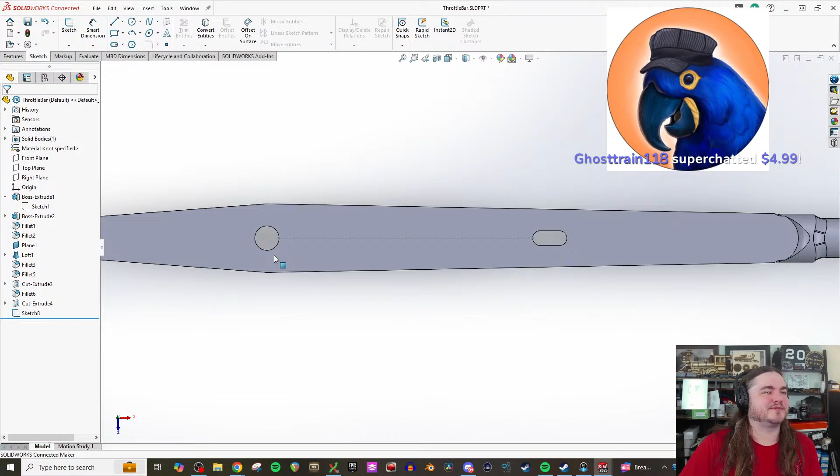Rex Anchor: you had no inkling that squid joke was going to go the way it did. Limes. Penman 4091: use planes to align the slot with the pin. I mean, that's basically what I'm going to be doing, just with sketches like a Neanderthal. But yes, they need to be on the same plane, which is what I was goofing up.

Ghost Train 118: hey, I see you've been thinking about this for a while, wanted your expert opinion on it. Is it possible for a 2-8-2 to be rebuilt into a 2-4-4-2? Everything's possible, should you do everything? You need space for the extra cylinders, all that. Stretch the frame, just grab the frame stretcher, it's next to the board stretcher, in the wood shop. But anything's possible. Would it make a lot of sense? No.

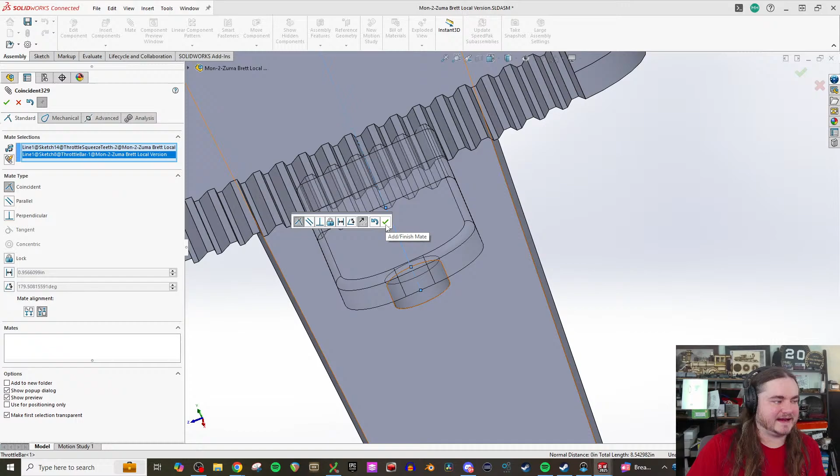Doctor and engineer, 20 or 32 months. Corey, come on, we all know us sailors love seafoam green. No, I'm not a sailor, I'm a Marine. So the Marines like purple, sailors like seafoam green. I mean, that tracks, seems reasonable.

Alright, so if I drag this guy till he's like barely in there. Oh wow, 7 inches was not spectacular. How did we goof up this, the arc of that?

It must need to pivot around the initial pin and not the dead pin, like I thought, like a ding-dong. Uses tangent constraint - I'm being backseat SolidWorks, but by people who actually know what's going on. So, thanks, yes, a tangent constraint. It will need to go off that first pin, not the dead pin. Yeah, absolutely. I'm seeing that, by the way, that the arcs are aligning.

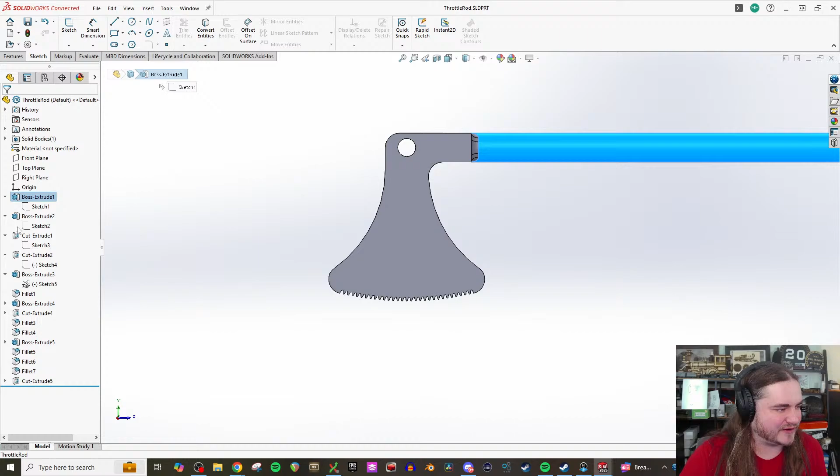But we'll try first, fuck around and find out, figure it out later. Oh, I am so excited in the ways that making this point and this point merge are going to ruin every part of this. You heard me, zero. Is numlock off? Nope. It's not having me put that dimension at zero. That can only end well.

It'll let me do that. That looks pretty good. Yeah, I had a feeling that most things would not rebuild properly anymore. Yeah, dead fillets. No, not dead fillets. I knew this was going to be fiddly and annoying. We said that in the poll at the start of the stream. Yeah, this sketch is going to be all kinds of borked now.

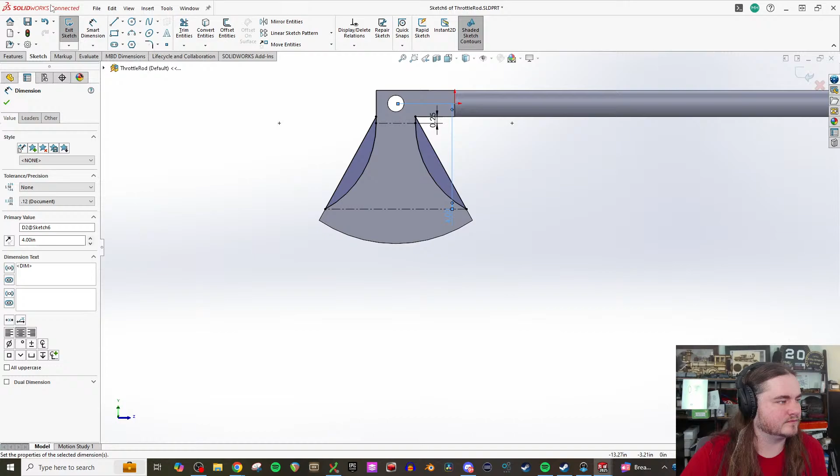Panman491, you had 2 model trains clash at the club the other day. You heard Smells Like Kenosha start playing Your Mind before the collision. Should I be glad? I mean, maybe. That's awesome.

Okay, let's get this all back where we were. Smooth edges cannot be deleted. That's not a smooth edge. Oh my God, what is a smooth brain thought of? There's 2 itty bitty little cute edges there. It's fine, whatever.

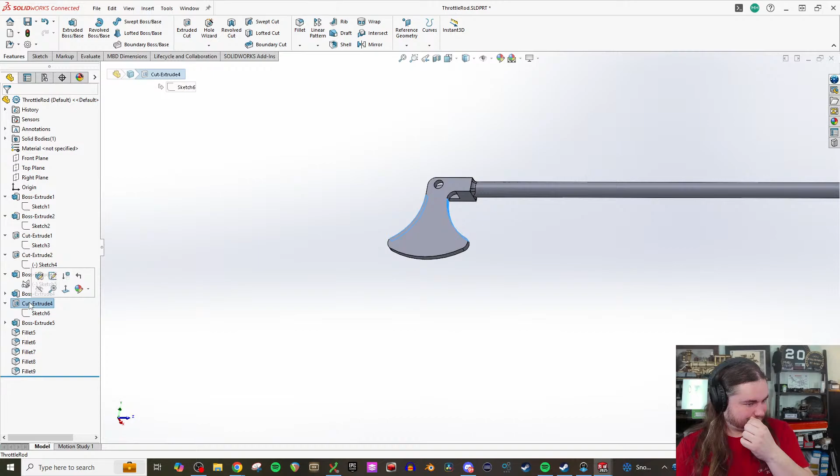Alright, so now all our teeth work has disappeared. That's fine. It's not like this is frustrating.

Does it look like the arc follows at least now? I mean, this guy's not constrained to be in one spot, so... Yeah, so we'll temporarily mate this part with this part, because we're probably going to have to remake it anyway.

Do you know what the word concentric means, SolidWorks? I can't make him coincident.

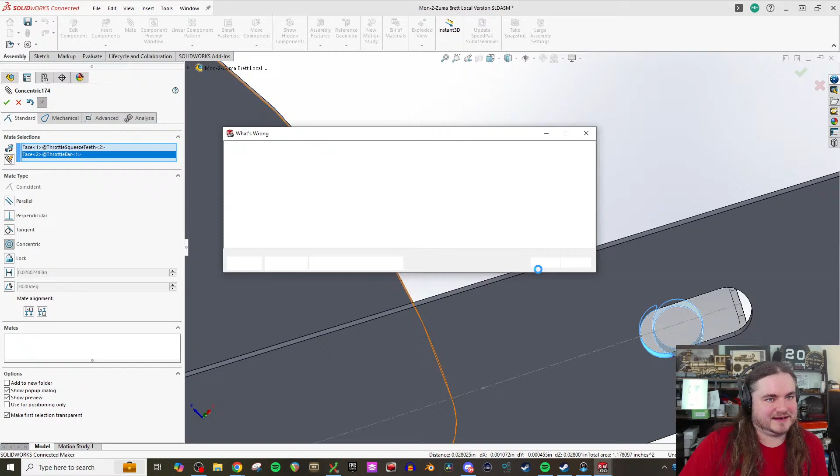Your computer's hating life right now. Yeah, I mean this is a huge assembly to deal with, and so it's definitely using a lot of tractive effort here.

Well, now the throttle won't move. That tracks.

Oh yeah, that was the one that Panman said to not use a coincident for. Which, you know, seems fine.

Brian Simpson: hello Heisen team, how you doing? ESD engineer for 24 months. Welcome to being a 2-year member. Thank you so much, Brian.

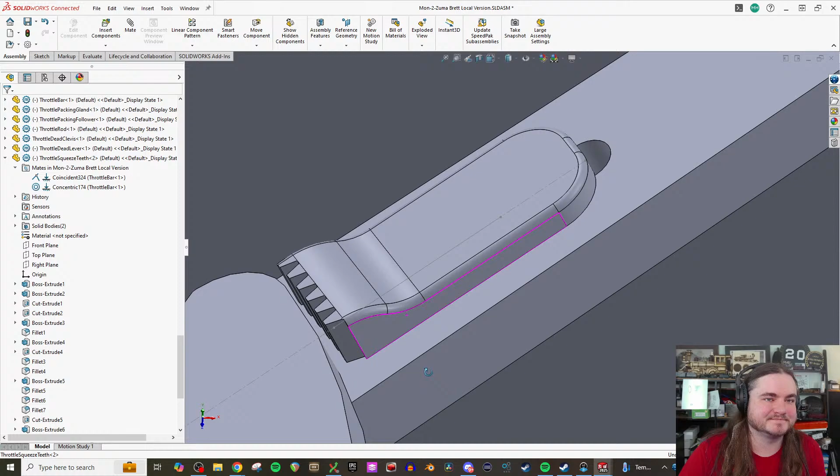Okay, if we can get the mate on this part and the mate on that line. What was it called? What did he say? Tangent. It won't let me do tangent. What else is new?

Alright, that's letting us slide here. Alright, and that, okay, yes, that's exactly what we needed there.

God, that thing's got a lot of travel the way it's set up. I don't know if you'd want that much travel wide open. Well, maybe you would. Hey, you got to remember, there probably isn't that much travel there. Everything's just so much smaller.

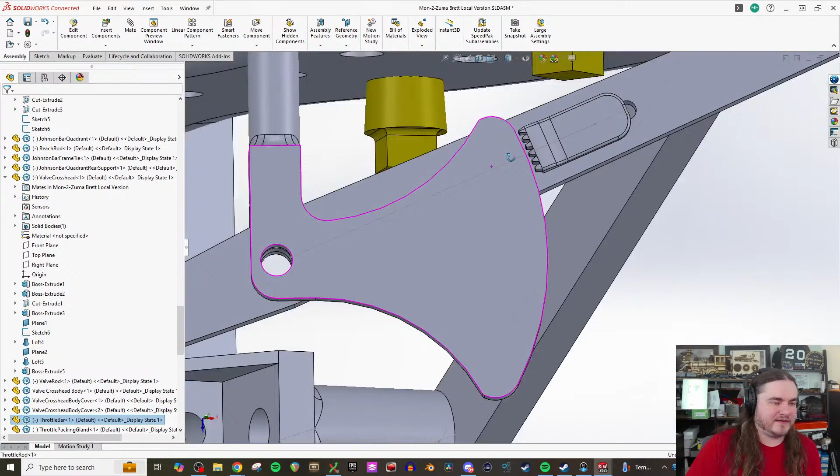Yeah, it depends on what we put in for the bell crank. Okay, well, the travel of the throttle's right. Now I just need to fix the teeth, and then fix the teeth on... I kind of actually have to remake this part, unfortunately. The teeth don't look like they're right anyways.

And I'm sitting over here like, I want food. And I'm supposed to watch TV shows with my sister soon. Then go do that thing. Yeah, who knew that you could do that. Yeah, I think I'm gonna go do that thing.

We're gonna have to fix this. Maybe I'll fix it off camera, he said. But yeah, I'm gonna go take some time for me and my friends. With all that time you've got, you'll go fix it off camera. Yeah, something like that. Hey, I don't have a deliverable due for a video game at the end of the month, and I definitely don't have any videos in the can. It's fine, and I definitely don't have a 3-week trip coming up either.

It's okay, Mark, you know the CEO. I do, I know exactly who to blame in management for this.